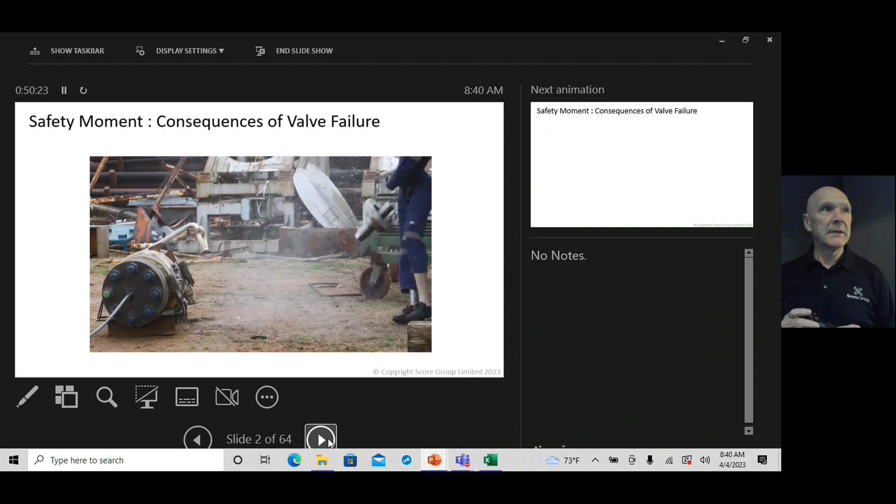We've got a valve being pressurized. What we've managed to do is get to about 40 psi there. There's our good friend Dick the Dummy. So what you're seeing there is an uncontrolled loss of containment on a processed fluid. It's liquid, it's a relatively small volume, but you can see the stored energy is absolutely huge. That's about a 15 kilogram chunk of stainless steel getting ejected and hitting our good friend Dick the Dummy and bringing him to an unfortunate end.

What we talk about is being in the line of force. You never want to be in the line of force. So when you're working in and around valves, understand that stored pressure and containment is the primary activity. Once we've got that under control, we can then start thinking about other things like through seat leakage. So hopefully that's focused everyone's attention on the dangers.

When we operate valves in and around the process plant, there are pretty much three things that we want that valve to do in terms of process, because the other answers you gave me are all about managing the process flow. There's a safety element, there's an environmental element, and there's a process efficiency element. So when we operate normal process plants, we're exposed to high operating costs, high exposure to risk, and our

efficiency suffers when we see those unplanned, unexpected failures in service. What we want to do by using condition monitoring tools is to move the needle away from the red bars and start focusing on the green bars. How can we take our operating costs to the lowest possible number? Because that helps us with profit margins. How can we minimize our exposure to risk and trend it to almost zero? I think absolute zero is a target. It might not be achievable, but we can certainly get very close. And then thirdly, we want to make sure that the process plant has maximum uptime. That requires reliability in our populations.

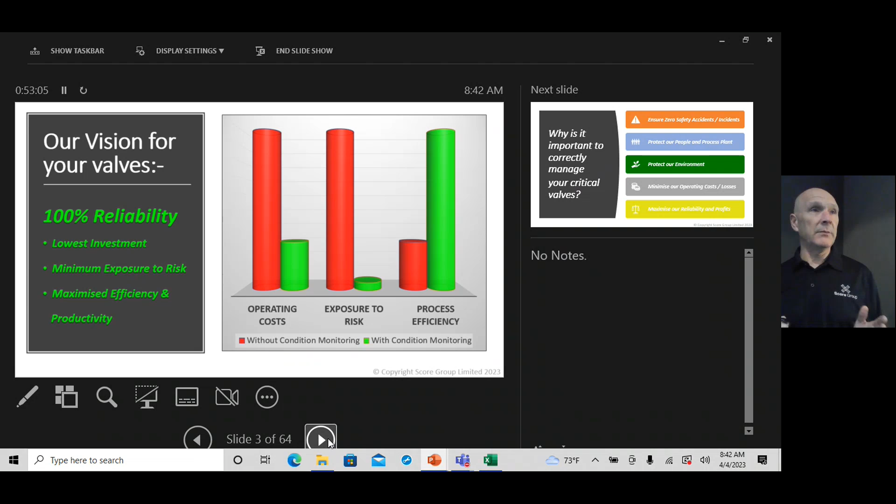So the key thing about all those elements is that when your valves start to fail in service, they give a really early warning signal, long before they cause that unplanned shutdown. So all of the tools that we should be using should be looking for that earliest possible indication so that we can catch it before it causes the unplanned reliability event. So that's how we move from red lines to green. The condition monitoring tools show us the early indication of where the problems are. We address them before they cause that unplanned shutdown.

Everyone understands, I'm sure, that an unplanned shutdown is a far higher cost than a planned shutdown, because in a planned controlled environment, you can pre-order spares, you can do things in a shorter time period. The window of opportunity to effectively create a repair is much shorter. So everyone understands the biggest cost on the plant is downtime. That could be anything between $1 million or, as one of our customers told me a few weeks ago, $3 million per day. These are big numbers. The valve repair pales into insignificance when you compare and contrast those two numbers.

So this technology should help us get to that zero accidents, incidents, near misses. We should be helping our people stay safe on the plant on a daily basis. We should be protecting our environment from those fugitive and through-seat leakage emissions. When we minimize our operating costs, it seems obvious to everyone in the room that we're going to maximize our reliability and resulting operational profits. So there's nothing in those five boxes that we don't want to happen. We want all of that stuff to happen. So that means we need to deploy the right tools at the right time and do the right maintenance at the right time.

When we do that, this will be all the outcomes that we can expect. So this is a really positive story. Condition monitoring will deliver all the benefits that are listed on the screen.

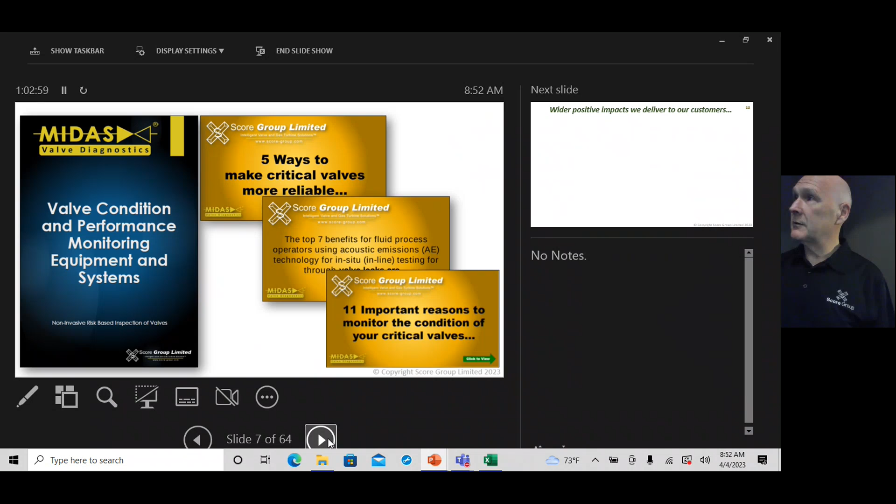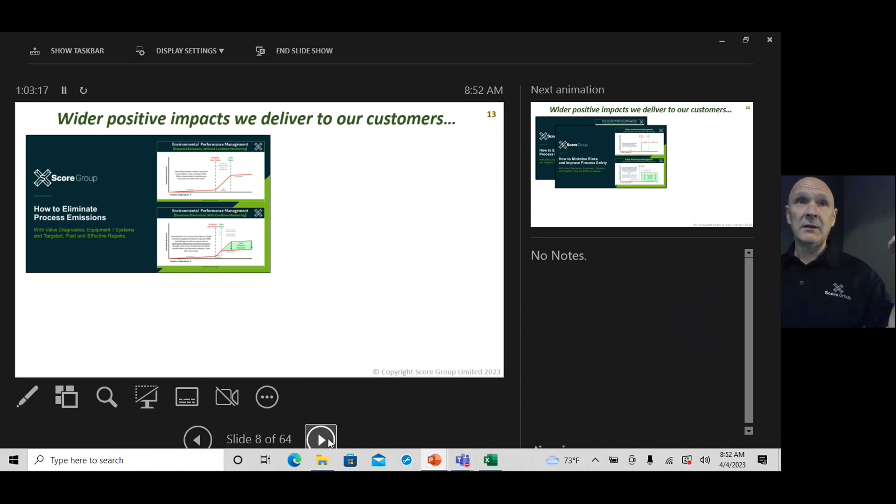Okay. One of my presentations in the main conference is going to be on the additional benefits that are delivered when you start managing your emissions. This always starts with the emissions discussion, and it always ends with process efficiency, reduction of losses, efficiency gains, all the things that are on these little graphs. Our start position is the top graph, our end position is the bottom graph. I'm going to speak about these in great detail in another presentation, so I'm not going to delve too deep into it today, but if you are interested in that, come along to that session.

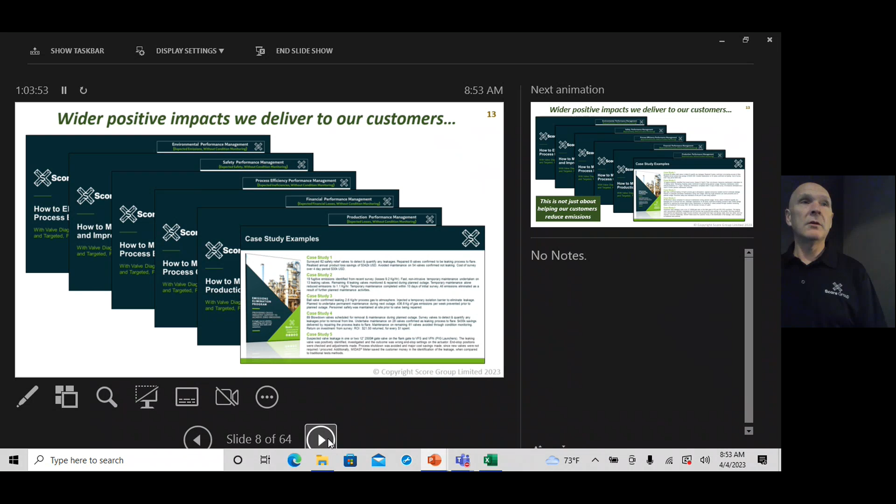I think it's on Thursday afternoon, just after lunch, and you can see all these little green highlights where the gains are made and how they are made. So in answering those questions, it's not just about the case study works, what was in it for someone else. You can start to think about what's in it for you specifically at your operating plant.

As I said, this is not just about emissions. People have been talking for a while about the burden of additional work scopes, additional monitoring sessions. You know, that takes a resource. If you want to send a guy out in the plant to do this work, as we did it when I was in a refinery, it could be days worth of work, somebody manually taking all those readings.

A lot more efficient to permanently install the sensors. That's layer 2 operation. So again, just think about that journey that you're likely to be on. If we can deliver value at step 1, you're likely to take step 2.

So valve management. Just for the operators in the room, do you currently have a formalized valve management program in play? Hands up if you do. No? Valve management is a simple process. There's only 5 steps. People talk about total valve management. You know, we talk about intelligent valve management. Intelligent valve management with those 5 steps will take you to the best possible reliability. So this doesn't need to be a really complex system.

Let's keep it simple. What most organizations do is they buy valves on the basis of someone a long time ago who was building a plant decided this valve should be in that slot. So the valve is defined on a valve data sheet. The valve data sheet goes to the procurement team. The procurement team go out to the marketplace and select 3 to 5 vendors who they think can offer that valve asset in accordance with the description on the valve data sheet.

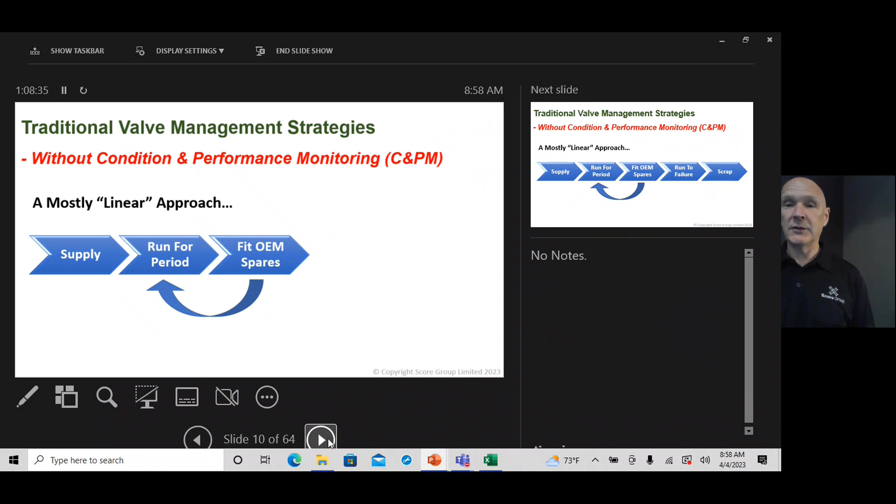Eventually, of course, all valves run to some failure point where you want to scrap it. And one element of that might be that you've got internal through-seat leakage, which has now caused erosion on the internal of the valve body because you've got an impact jet of process fluid leaking. The first thing that comes into the leak path jet of whatever your process fluid is starts to get eroded by that impact of process fluid jet. That wears down the body thickness.

Remember my first video, loss of containment is a disaster. So if you lose the ability to contain the process fluid in the pipe, you're in a dangerous position. So that is effectively one of the most common causes of run to failure.

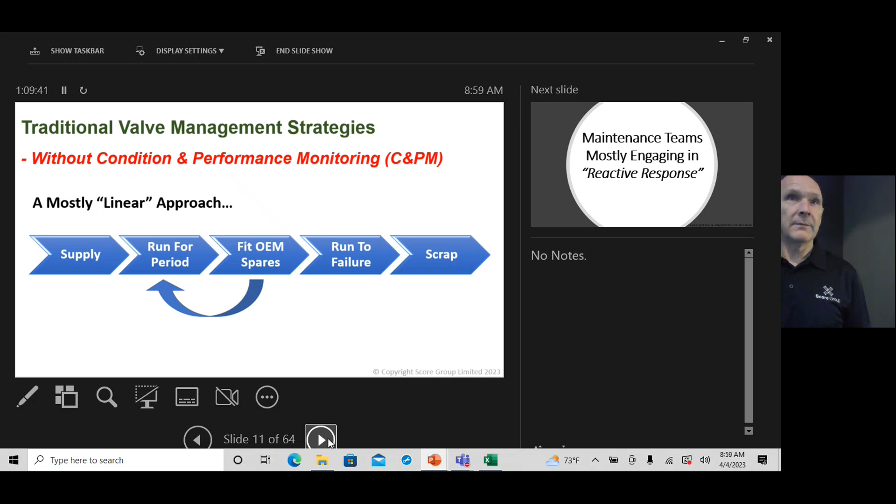Erosion on the internal body wall reduces its capability to withhold or contain the process fluid. So we'll scrap that valve and replace it with a new valve. Guess what? We go back into the 2-year cycle, even with a brand new valve. So this is broken. This is not efficient.

We want to move away from reactive response. We don't want to go run to failure, because if you've ever been on a plant where failures happened, it's ugly. I'm sure we've all seen the safety videos. So let's not go to reactive response. This is the highest possible risk that you could expose yourself to, and we don't want to be there.

So how can we change that dial? How can we move forward and get better reliability and spend less money? It confuses people when I talk to maintenance departments and CEOs when I say, do you know you can improve reliability by doing less maintenance? It fries their brain. They just haven't worked it out.

So that's what we're going to try and do. We're going to try and reduce the number of interventions. We need to quickly and easily understand where our problems are so that we can prioritize our outcomes. And our outcomes in some instances will be doing maintenance. In other instances, we'll be doing no maintenance, regardless of age of the valve asset.

So here's where the science comes in from Nowlan and Heap. Anyone who's been involved in reliability studies will know Nowlan and Heap have come up with a number of different conclusions. The bathtub curve is for mechanical products. Effectively you have infant mortality, as they called it. You see some early in-service failures. We go through a pretty stable operating cycle, then, in terms of late life failures, we're seeing that drilled down from mechanical failures in the field. Wear and tear, lots of different ways to describe it, but effectively mechanical failure.

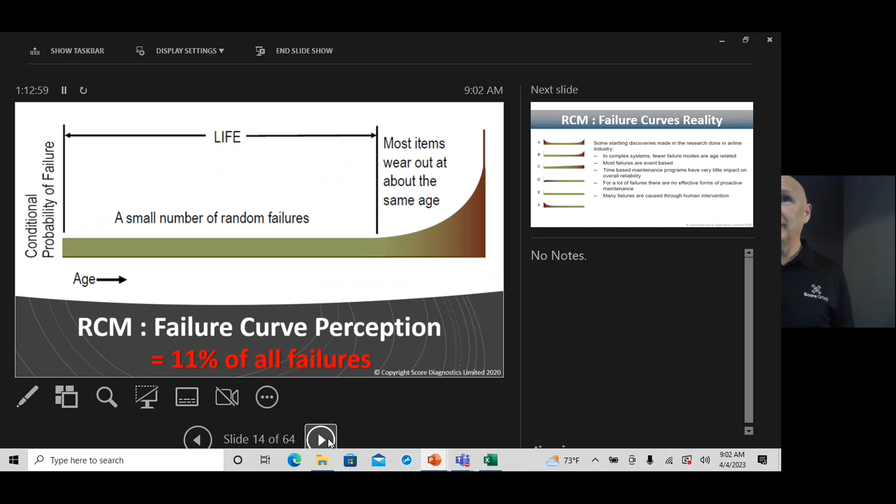So we need to change that approach. Let's not focus on the 11%. The bad news for Nowlan and Heap studiers is that the bathtub curve is just one of, as you can see on here, 6 curves. So what we're trying to do here is learn from the Nowlan and Heap study and say, what is it that we need to do differently?

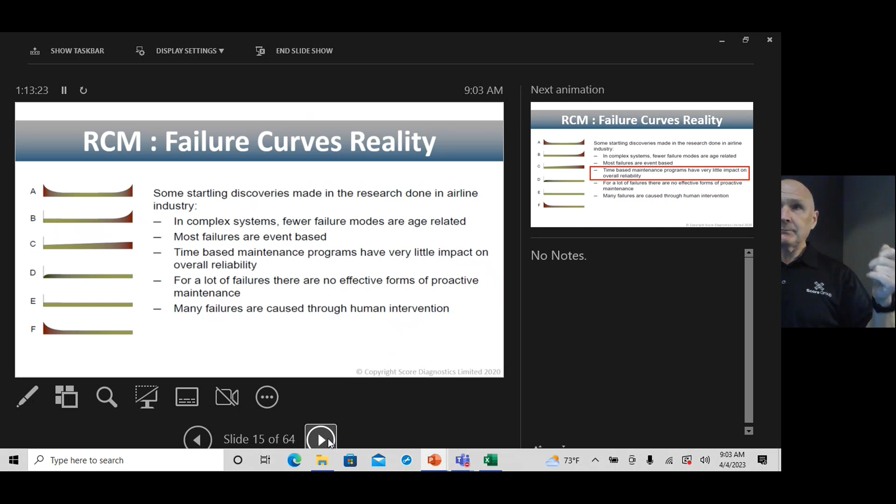There were two really important key pieces of information that flagged up to me in our early days on condition monitoring. Number one, time-based maintenance has almost no impact on reliability. Now think about that. That's what we do, as operating companies, that's what you do. That 2-year cycle of maintenance recommended by the manufacturer is having almost no impact on reliability. So why do we keep doing it? It's costing a lot of money to do that.

The second thing is, every time you let one of your operators go out there, and one of your maintenance team go out there and start playing with things, they break them. It wasn't broken to start with. How many times have we been in our own house, in our garage or backyard, trying to fix something and we ended up making it worse because we weren't the specialists at that specific piece of equipment? So a very simple story that resonated with our nuclear market customers.

This is important for the emissions discussion. When you look at emissions from valves, one of the most common failure modes is the stem packing. There are lots of conference presentations on stem packing materials and how to manage that stuffing box over its life cycle. So what we said at the nuclear conference was, if you send someone out to walk the line and look at all the valves, they will find a valve that has a stem leak. It's inevitable.

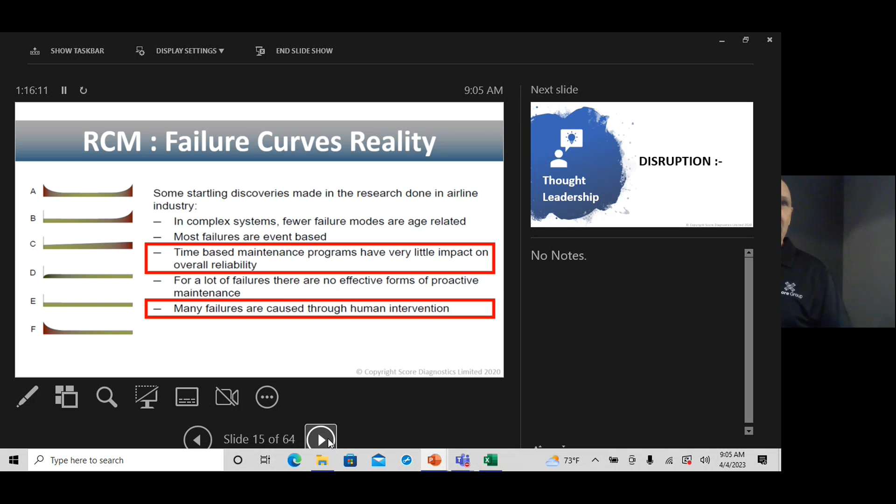So, really important part of the discussion. I'm a big fan of disruption theory. If we do what we've always done, we're always going to get the same results. This is not about getting the same results—we want better results, we want better outcomes. So we need to do things differently. What are we going to do differently?

We're going to introduce condition monitoring. Condition monitoring is what moves the dial from where you're currently at, with all these problems I've described, and takes you forward into that new space with lowest operating costs, minimum exposure to risk, and maximum reliability, profit, and efficiency. This is intelligent valve management.

Five key steps—I said it was really simple, let's not overcomplicate things. Step 1, front-end engineering design. When the process is designed, some smart engineer will say, this is the valve you need to do that work. That engineer will describe it in great detail and make it into a valve data sheet. He'll send that up to the purchasing team. The purchasing team then goes out to the marketplace. We buy the valve, and as SCORE, we also install valves—we can do all that work for you.

At that stage, we want to introduce the new step, step number 3, which is condition monitoring. Go figure—we're not just a valve company, we do condition monitoring as well. We've worked out that step 3 is the missing ingredient to get us toward this efficiency model I keep describing. So condition monitoring tells us the exact point, the optimum time in the valve's life cycle, to make that maintenance intervention.

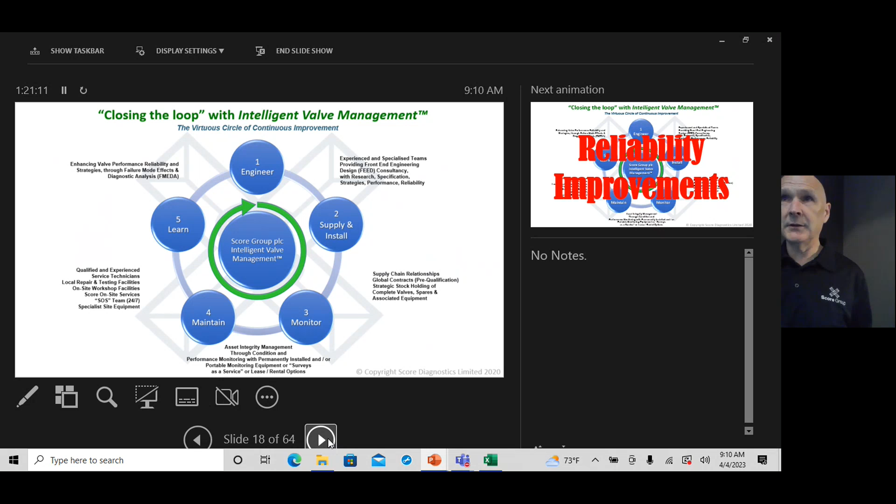So big numbers. So we're all about reliability. We're all about making that improvement that takes you to that beautiful space that we've discussed earlier. We talk about RBI. So the guys who are in pumps and motors, rotating equipment monitoring have been doing this for a long time. Valves were forgotten. The land that time forgot.

Yeah, we don't need to be in that space anymore. Let's use the available tools and work out what's the probability of failure, what's the consequences of failure, how often do we need to monitor that valve to be confident that it's still fulfilling its intended function. The minute it looks like it's not performing its intended function, we can start thinking about doing maintenance then. As long as it's performing its intended function, we're going to leave it alone.

Of course, there does come a point on this cycle where we think the risk is so high that we don't want to rely on somebody going out and using a handheld device. We want to permanently install sensors. So we'll be somewhere on that continuum.

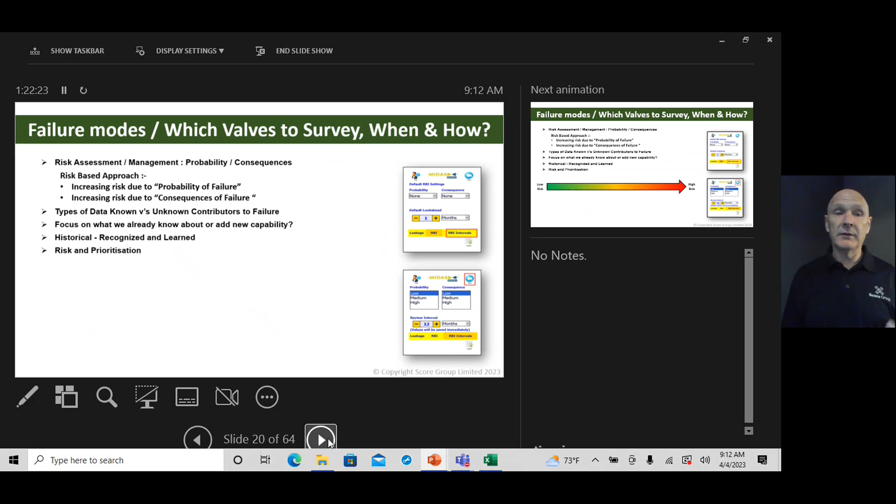Probability and consequences of failures allows us to select the correct monitoring tools and equipment to manage risk and prioritize our data set, to prioritize our maintenance activities. So it's all about efficiency. Infrequent manual surveys can be done with a handheld tool. If you want to move to semi-automation, then you need permanently installed sensors.

I'm going to give you some bad news. Whilst we're all in this conference looking at emissions, there's kind of two areas where that's going to come from in terms of valves. It's going to be leaks to atmosphere or through-seat leakage as your primary things, or the flange joint that attaches the pipe end of the valve to the pipe end of the pipe.

When you look at the most critical valves on your plant, you're not just looking at leakage as a failure mode. There are actually 48 recurring failure modes. That's bad news because you need more sensors. So what we've got in our continuous fully automated monitoring system is up to 12 sensors looking at your most critical valves, predicting in advance of failure those 48 failure modes.

Now, it's not just SCORE that's working on this capability. I sit on the technical committee in ISA, TR 9605, and what they're looking at is all of those 48 failure modes and how they can be detected in advance of the failure happening. So if we can see the trend towards a failure mode, we can do planned maintenance in advance of unplanned shutdown. So in terms of management of risk on your safety critical valves, you really want to go all the way past go, collect your £200 and be living at continuous, fully automated monitoring on those highly critical valves.

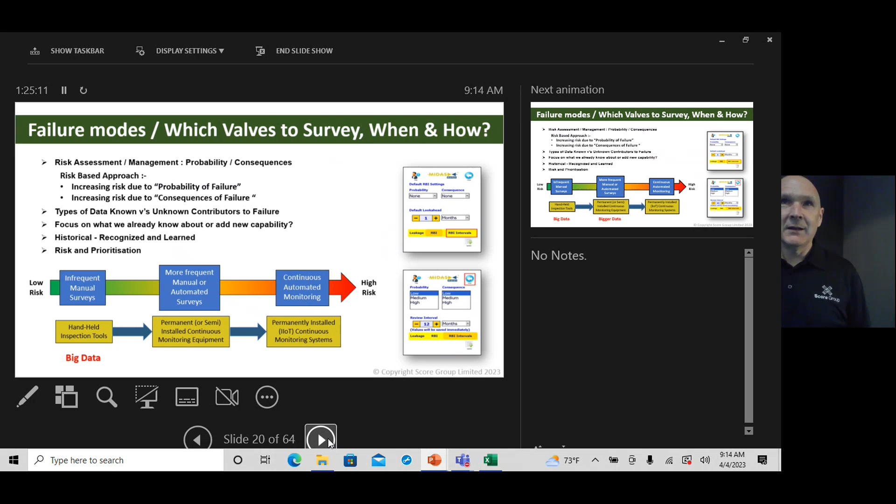Our guys in USA, our head office, said we have to invest in big data. So we started collecting all this data and we got to big data and we realized there was a problem. We wanted to create a data lake. What we ended up with was a data swamp. We had so much data and we didn't know how to analyze it. We didn't have the capability to do the analytics that would pull out the golden nuggets that would actually deliver some value back to us.

So as we move through our technologies here, big data is the start point, bigger data is a midpoint, and the biggest data set is where the maximum value can be returned on your investment. The key to this is being able to do the analytics. How can we connect each part of that data set to a failure mode? That's where the magic happens.

So this is all automated. You don't have to be an expert analyst to make that happen. We've done all the hard work in the background. We just deliver back to you where you can add value. So it's that little bit in the closed loop of five dots that says, what are we monitoring and what does it mean? And how's that going to drive our maintenance program?

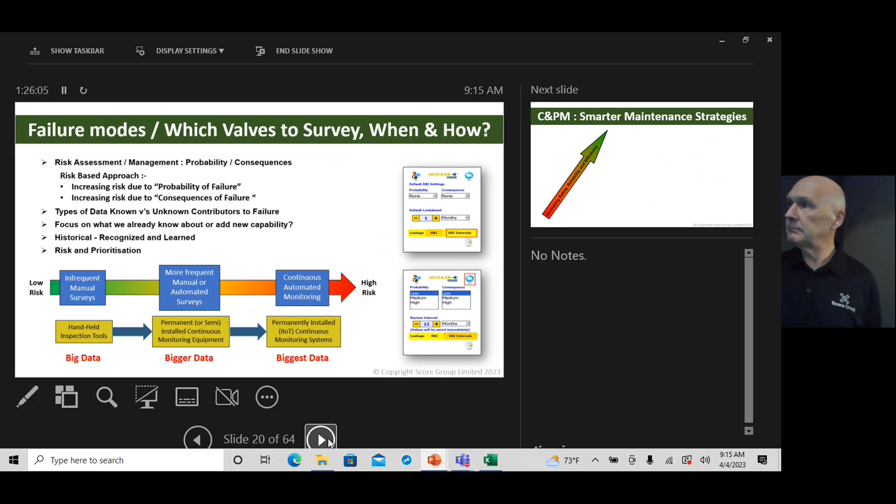So it's all about improving reliability. We start with troubleshooting. This handheld device, entry-level product, sometimes customers just go out and say, I've got a problem in my process. I can see there's leakage, but I've got a manifold situation here. There's multiple valves. I don't know which one's causing the problem.

If you're doing that on a flare line, and by the way, flare lines are the biggest emissions because flare lines typically have leaks on the valves that are difficult to find. So the flare's going on for days, weeks, maybe even months. You can't get to the root cause. This will take you to the root cause. But it means that someone has to go out and survey each of those valves manually, and you will find it. So that's troubleshooting, just where is the problem.

So that's level 1 operation. Level 2 operation takes us to what I call value-based maintenance. Value-based maintenance is looking at all the data that we've been able to collect and say, okay, which are the valves that we really want to address in our next planned turnaround? Where can we make the efficiency gains?

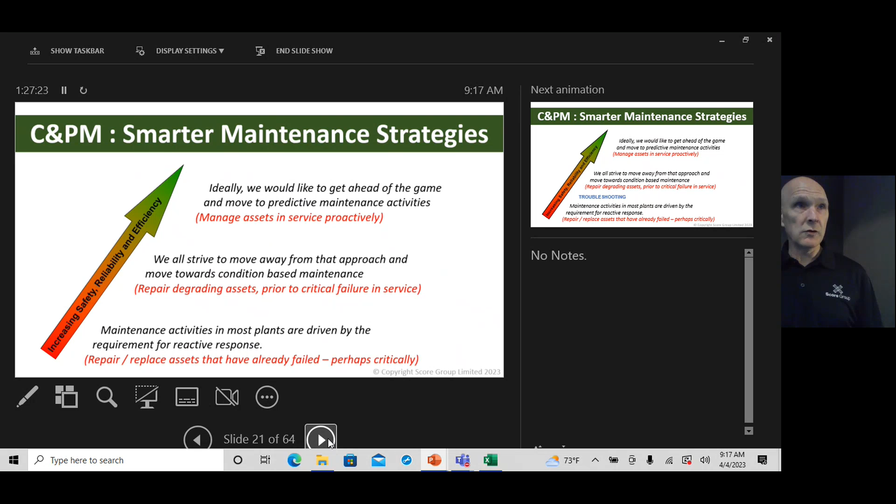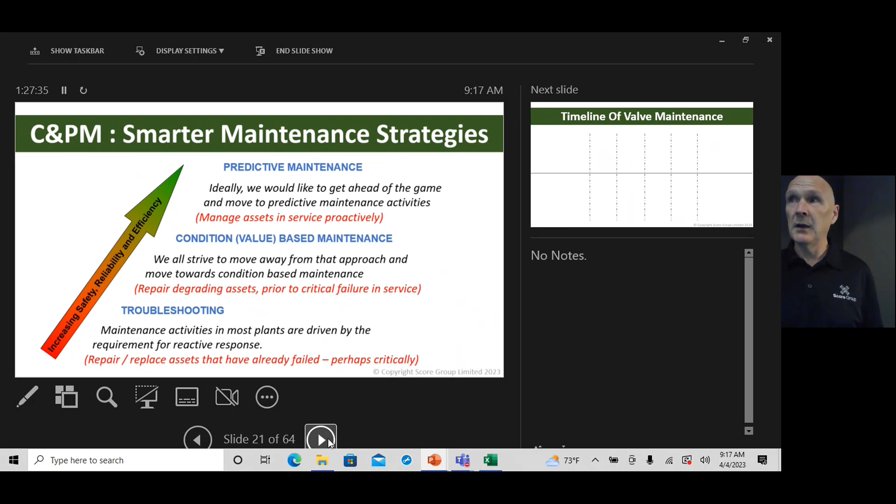Step number 3, of course, is the Valhalla that I mentioned earlier on. That is trending and looking at rate of leakage change over time, because that's what takes us to predictive maintenance. So troubleshooting level 1, value-based maintenance level 2, and predictive maintenance is peak performance. We want to take your process plant to peak performance. If we can get you there, we'll be the superstars that charged a few thousand dollars to return on your investment many millions of dollars.

So calendar-based maintenance, I've mentioned this already. Typically what happens in calendar-based maintenance is you have that recurring metronomic approach. The computerized maintenance management system said, do a planned shutdown every 2 years, fit OEM spares, and we'll be good to go for another 2 years. Nobody wants that anymore. They're saying, can the 2 be 3, 5, 8, 10, whatever? The answer to that question is yes, it can.

At the moment, your maintenance budget is being completely consumed by calendar-based maintenance, most probably. I can't say that for every operator because we are working with some who've already changed their approach. So how do we do it differently? Condition monitoring will be done on a risk-based inspection basis. And what you're going to find is when you start doing that survey work, most of the valves that you're repairing on that 2-year cycle are still okay.

Now, you're erring on the side of caution by doing that 2-year maintenance intervention. It's just in case maintenance. But remember, 40% of all failures are human induced. Letting your guys play with those valves and, in inverted commas, fix them might be making things worse.

So you can see here in my new approach, we've had the same operating cycle over 10 years. Calendar-based maintenance says that valve got repaired 5 times. It wasn't actually repaired, you just fitted OEM parts. When you start introducing condition monitoring, if the monitoring equipment says the valve is okay and operating fine, guess what? Leave it alone. Don't touch it.

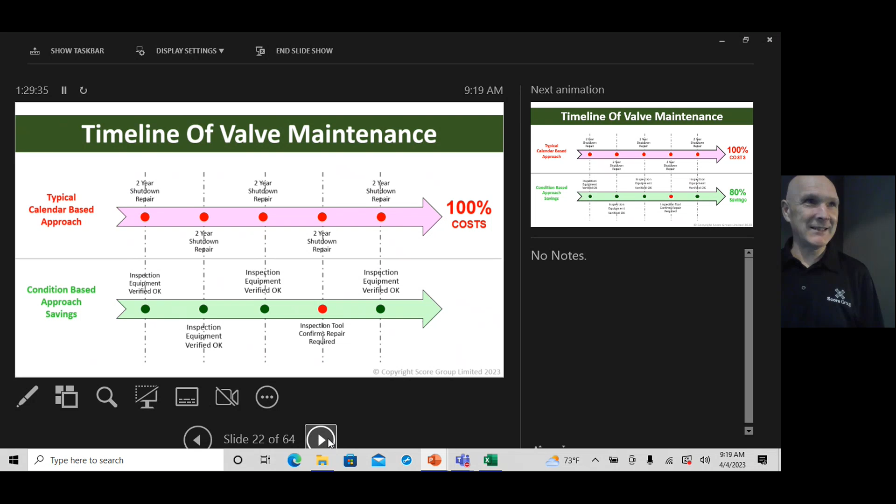Don't break what's not needing fixed, okay? So you can see in this example here, we did one repair over that ten-year operating cycle, and that already delivered 80% savings. Now think about what those 80% savings are. I'm not just talking about consumption of spares.

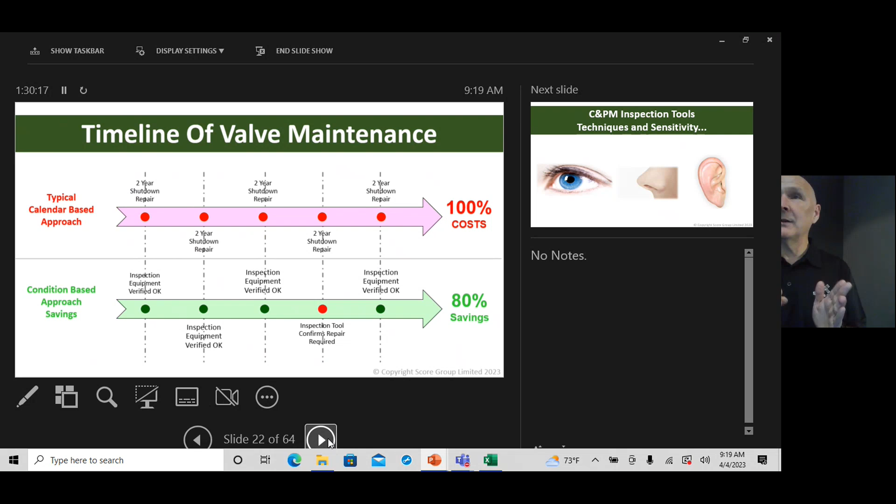It's one of many tools you will have been using on the plant already. And one of the challenges when I start talking about listening equipment, because we can use cameras to see things in more detail or different things. We can use sniffing technologies, gas analyzers, to detect gases in different ways, more sensitive than human senses. When I start talking about listening devices, people say, yeah, we used that in the past and it didn't really work for us.

And there's a specific reason for that. The listening devices used in the past were listening in the wrong sound frequency response range. They listened between 0 and 60 kilohertz. Human hearing takes you to 20. So by using ultrasonic equipment, it was effectively giving you three times human hearing capability. And the reason 60 kilohertz was chosen is because that's where the roots of rotating equipment monitoring systems are firmly embedded. So if you're using ultrasonic equipment for pumps, motors, vibration, you're typically listening 0 to 60 kilohertz, mechanical noise.

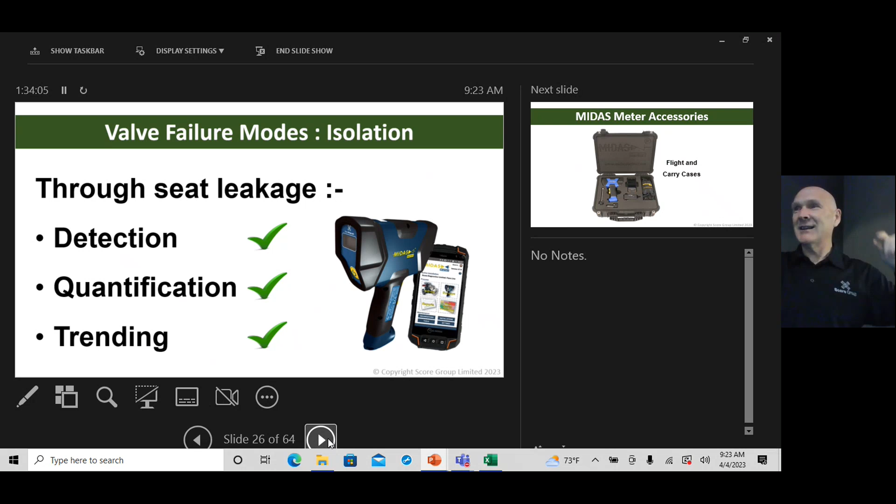Did you have a question? Quantification. Leak detection, quantification, and repair only when necessary. So let's all try and get the hashtag trending. Maybe we'll finally manage to do it this week.

So like all products, we deliver this in a carry case, flight case. The key element of the toolkit is the listening device itself. There's no headset, it just comes. The first question we're always asked is, will it still work in a noisy area? And the reason people ask that is because human hearing, 0 to 20 kilohertz, used to be one-third of the range of the ultrasonic device capability.

So what we said was, we don't want to be distracted by plant noise. So we've filtered all that away. We've taken it out of our equation. That's why we tuned our sensor to only listen between 60 and 600 kilohertz. So that noisy area of the plant that you want to use this on is not an issue for us, because if you can hear it, it's below 20 kilohertz, and we're only listening starting at 60 kilohertz and going all the way through to 600. So even the noisiest area of the plant, this will give you the correct answer.

No more guesswork, no more confusion. The other thing we're asked is, do we need a baseline from the brand new valve to make this device work in terms of quantifying the leak? The answer to that question is no. You can deploy this tool at any point in the valve's life cycle and still get the right answer.

The reason for that is we've done all the research. The research on all the differential pressures, all the fluid types, all the valve sizes, all the orifice sizes, in other words, the leak path sizes, leak path geometries. We've done all that research work.

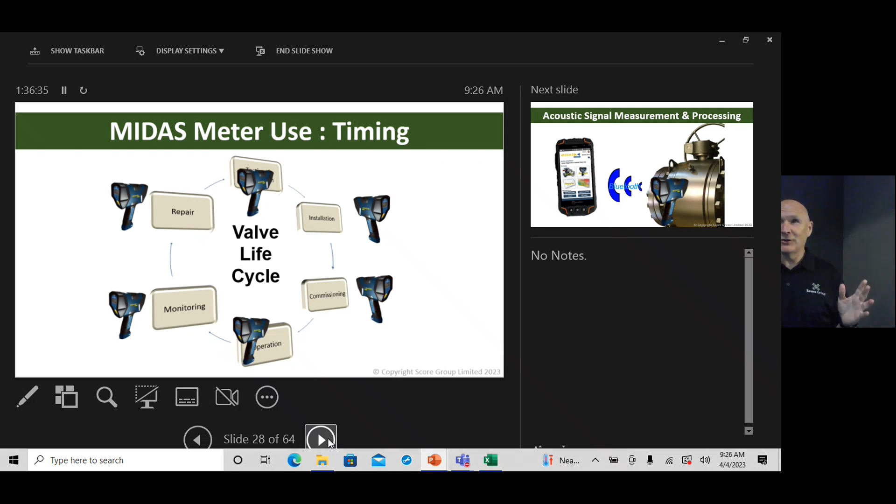This is not something you pick up and decide, you know, we're going to redesign a product, we're going to develop it next week. This has taken us 20 years to get a one-size-fits-all tool that you do not need a baseline from the valve on when it's brand new. So it's been a long journey for us. Exciting, we can now use it in any part of the valve life cycle.

So deploying it in the field, we take readings from the valve body, upstream and downstream of the valve. We click this little switch on the front here. That sends a signal by Bluetooth into our handheld calculator device, which then converts decibels of noise into leak rate going through the valve. So we want certainty in our survey.

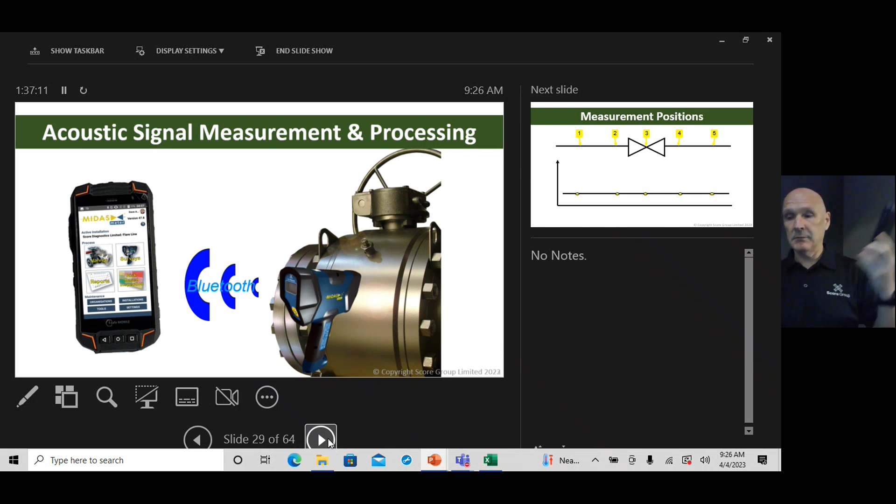If there's anything in and around our valve causing nuisance noise, we're going to be able to find that, and we're going to be able to eliminate it from our survey results. That is why we take readings upstream and downstream of the valve, as well as on the valve body. So this is a complete survey using technology. We start on the upstream side.

We start with a background reading, make sure the sensor's working, and then we start taking readings from the pipework. Position 1 is upstream far, position 2 is upstream near. Depending on the valve size, we'll take at least one reading from the valve body. If it's a bigger valve, we'll take multiple readings all the way around the valve body.

All the intelligence for how many readings do you take on which valve type, which valve size, is all pre-programmed in here. So literally, I can make you a leak detection expert in 30 seconds using this technology. So when you come up to the expo hall, you'll see we've got a little demo panel, and you'll be able to play with this. So I encourage you to come across and actually get hands-on with it. 30 seconds worth of intervention will let you find the valve leak.

Yes. So what would be the threshold on it, or would it just tell you, period, if anything's coming out from any part of it? So there's a number of thresholds that we need to think about. There's potential banana skins in all surveys. The first banana skin I'm going to talk to you about is external noise. So any interference noise that's in and around the target valve that you're trying to survey.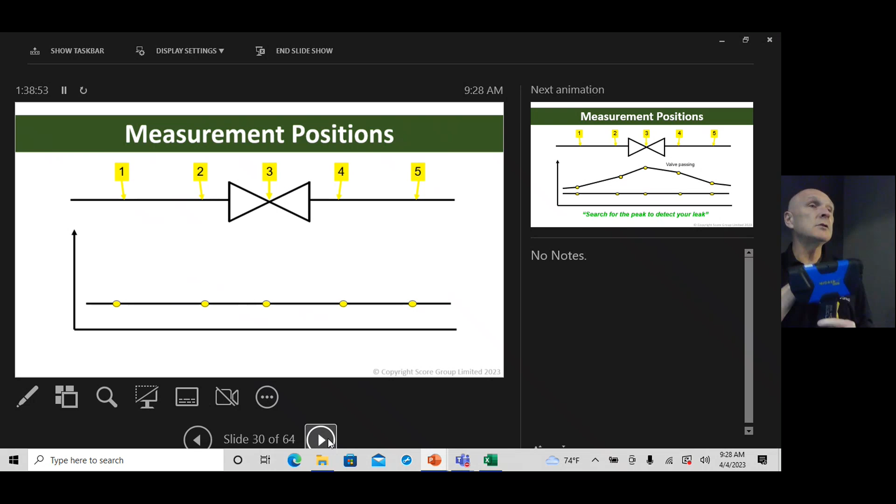So this survey here, if this was our result, when you switch the device on, it'll say 21 plus or minus 1 decibel on the LCD screen there. That's effectively the sensor here in the onboard electronics. It will never change unless you've broken the sensor. So threshold of detection, typically for a conclusive leak detection, we're looking for at least 1 more decibel than what we've got as our background reading.

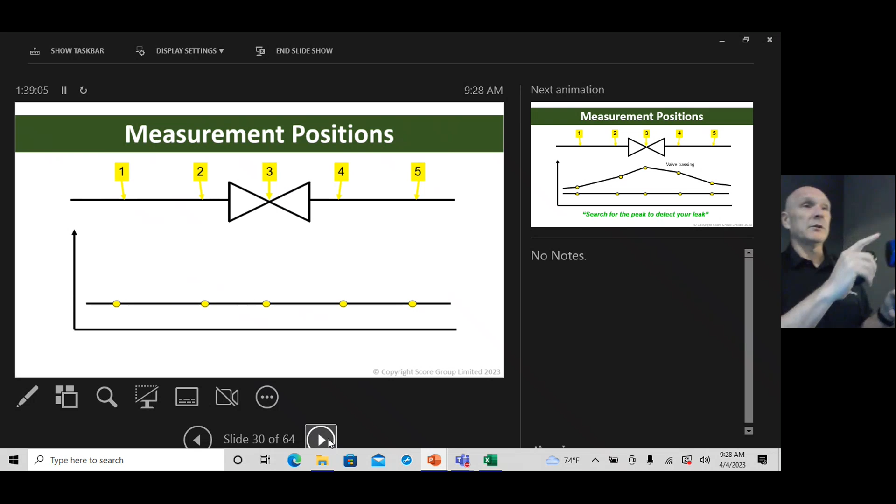So let's say we're in 21 plus or minus 1. Let's say we're at 23 decibels, and upstream and downstream of that valve we're measuring 21. We're talking about leakage there. So the more decibels of differential you get from upstream and downstream, the more conclusive your result's going to be. So again, these factors are all controlled by differential pressures, valve sizes, fluid types, leak path geometries. So lots of variables in that equation. So there are multiple thresholds that we need to get you to fully understand.

But if this is our survey result, let's say we got, and every process has noise as well, I should point that out. So this could be actually 30 decibels at each of those positions, but we've got a flat line. It's exactly the same reading upstream, on the valve and downstream. That valve is not leaking. I'm conclusive in my result here. No leak detected.

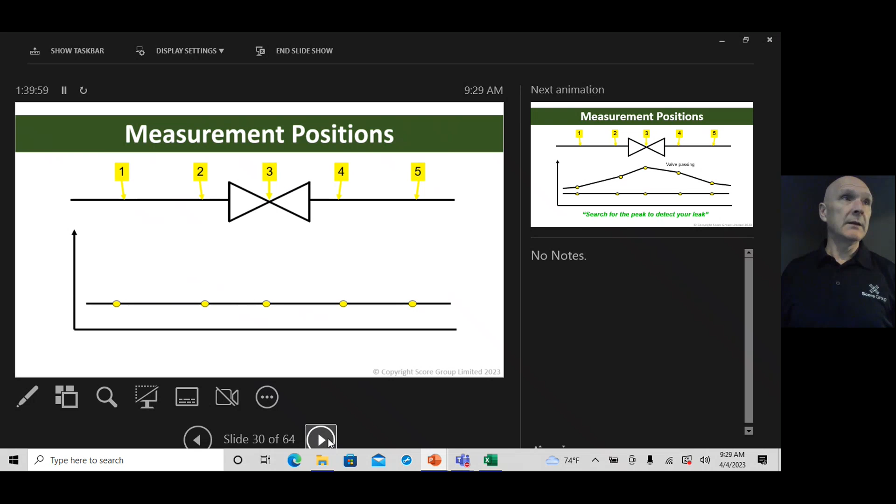In a leaking valve, we're going to see the peak signal on the valve body. So again, just for the purposes of translation, sometimes this gets lost in translation. When we say valve passing, we mean process fluid is passing across the seat-to-seal interface. It's not passing the test, it's failing the test, but fluid is passing where it shouldn't be passing.

So peak signal on the valve body, we're seeing increase in decibels as we approach the valve, and as we move away from the valve, we see those decibels dissipate. High frequency sound signals do not travel over long distances. So we talk about signal attenuation. So that high frequency signal, even within a few centimeters, you're starting to lose that signal. So the further away you get, the more conclusive result you're going to see.

We talk about near and far positions, and people get really excited about how near is near and how far is far. We cover all that on the training course. It's not a critical distance. What we're looking for is differential signal. Okay.

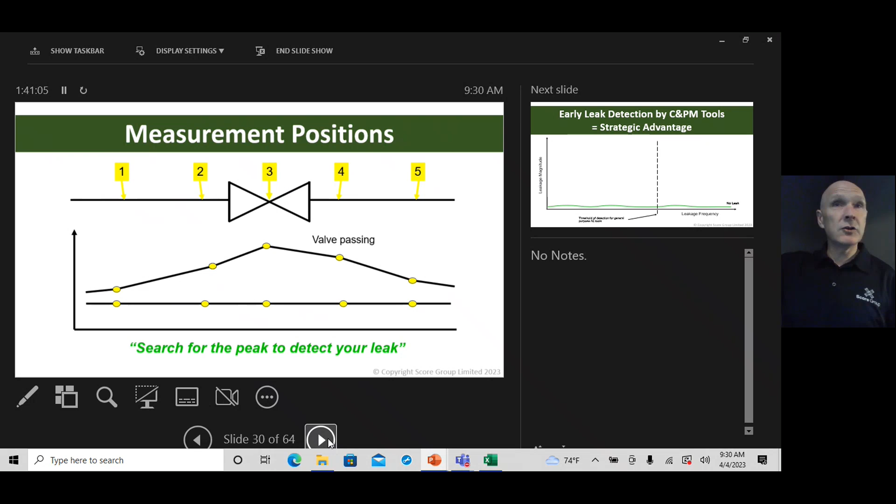So here is the science I've mentioned before. The threshold of detection for ultrasonic devices is on the left-hand side of the graph here. Threshold of detection that we're interested in is on the right-hand side of the graph. The dotted line, the vertical dotted line, is effectively 60 kilohertz.

Ultrasonic equipment cannot find early leaks in valves, and that is where the biggest possible advantage can be delivered with condition monitoring of valves. So that's why we tuned our device to listen above their threshold of detection, typically above 100, above 300, and just short of 600 kilohertz. Early leak detection gives you that advantage in your maintenance program. You can now start trending that leak over time.

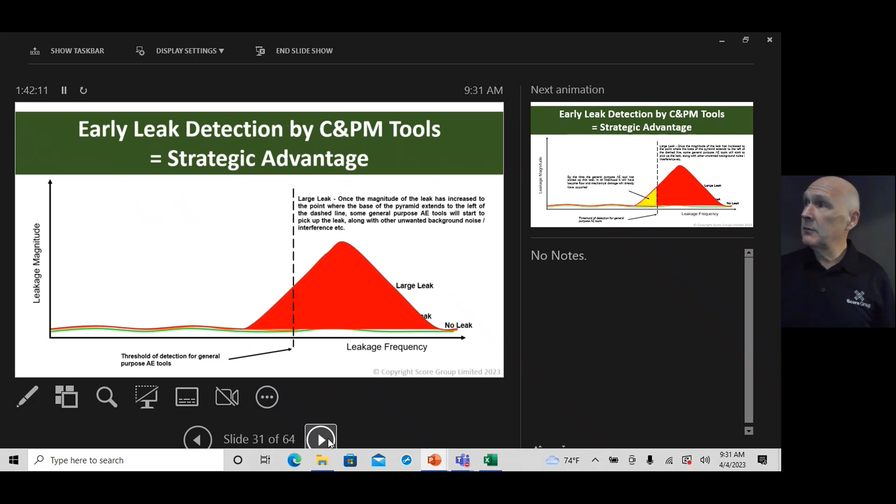The reason people thought ultrasonic equipment was going to be the answer is when the leak gets really big, the ultrasonic equipment will be able to detect it. But you're already at a stage where you've got significant mechanical damage inside that valve. If you're lucky, you found it with the ultrasonic equipment. If you're unlucky, it's already gone bang, because that mechanical damage is already significant. So we don't want to rely on the ultrasonic equipment anymore. We must move to the acoustic emissions with that higher frequency signal and that earliest possible leak detection.

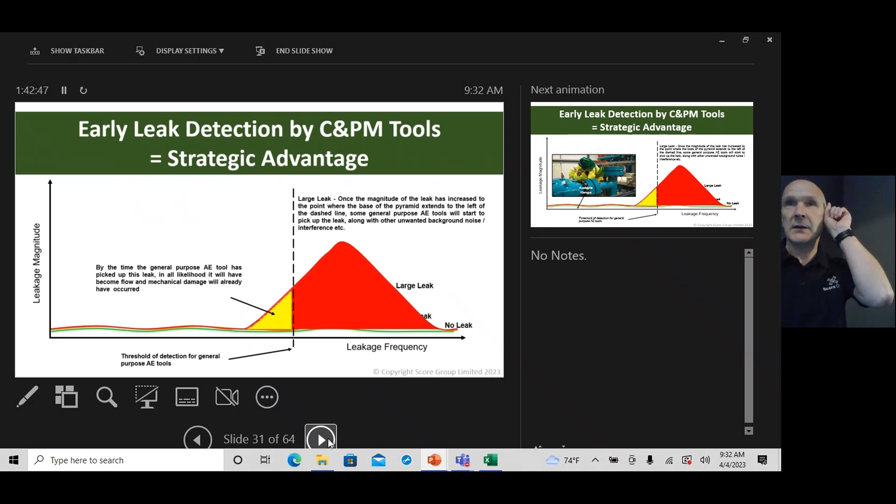Has anybody got a guy in your maintenance team that says, I don't need any fancy equipment, I'll just use a screwdriver? And you got that guy? See this guy? He's dangerous. He's walking about the plant with a screwdriver. He's listening. Most of these guys are also quite, let's just say, experienced. In terms of age, the number is higher. They've already lost the capability to even listen to 20 kilohertz because they've been in and around mechanical components, their hearing's a little bit less.

That guy with the screwdriver telling you where your leak is, is living in cuckoo land. He's got no idea what's happening over here. And by the way, if he's poking rusty old valves with a screwdriver, don't stand beside him. Remember, human-induced failures, 40%. That goes bang.

It's a funny story, I was on a process plant in Scotland. I won't tell you who the operator was, but they closed the valve and the whole process pipework started shaking and rattling, and I'm getting really nervous here. And I said to the guy I was standing beside, an old operator guy who's seen everything, done everything, look, I'm a bit nervous about all this vibration that's going on in the plant. Should we not move away from the area? He goes, no, everything's fine. But if you see the soles of my feet, run in the direction I'm running in. I'm like, you can't run fast enough to get away from an explosion. That's not going to happen. So don't rely on the guy with the screwdriver.

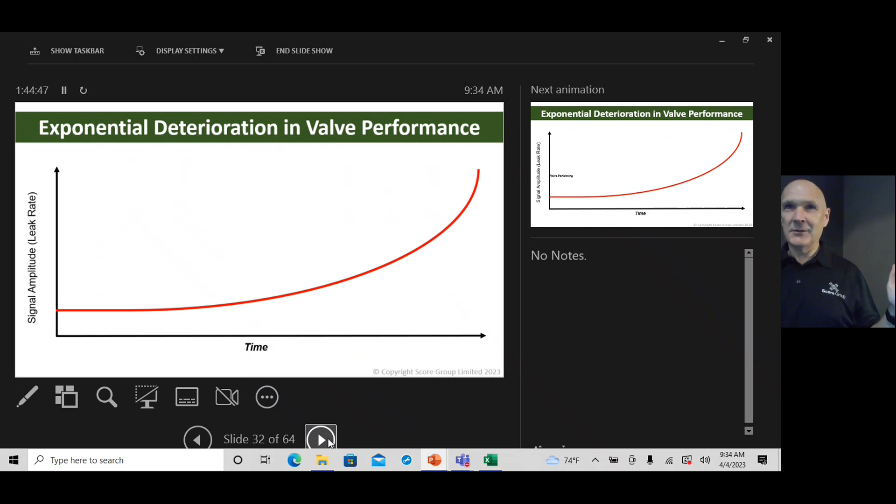When the valve was brand new, just to clarify for everybody in the room, every valve leaks. People talk about zero leakage. It's not happening. Every valve leaks. Every time you operate a valve, you put the seat-to-seal interface at risk. Even when the valve was brand new and it went through its factory acceptance test, there was an allowable leak rate for that manufacturing standard. And that's to make the valve cheap to sell.

If you want every valve to be zero leakage at the manufactured stage, you're going to have to pay a lot more for your valves. Nobody wants that. So the standards, ANSI, API, all the standards say there is an allowable leak rate for that valve when it's brand new. So even when you put that valve into service brand new, it's leaking. But it's leaking at a tolerable limit.

You start operating that valve, any debris, any foreign particles can scratch the seat to seal interface, that rubbing action, whether it's a sliding gate or a rotating ball or whatever. Your seat to seal interface is at risk with every single operation. So the first time you operate the valve, you could have created a leak path. You don't know it's there because we don't have X-ray eyes. And we didn't previously have the tools to be able to find it. We now have the tools.

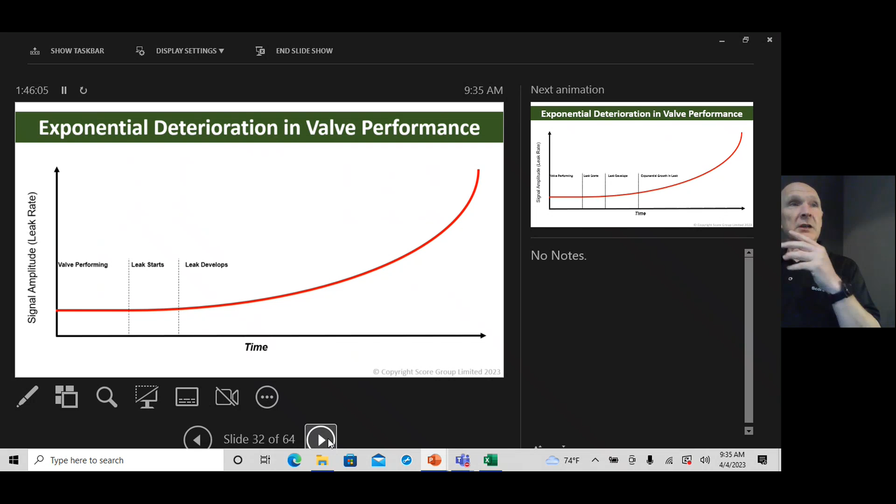The more times you operate the valve, the more that opportunity for foreign particles is going to create more leak paths. The longer you leave that leak path in play, the process fluid coming through that leak path is going to start doing that erosion exercise that I mentioned earlier on. So the erosion, the stripping away of particles, makes the leak path bigger over time. And that's why in late life, you'll see an exponential rate of change in your leak rate growth over time.

Without condition monitoring equipment, you have no idea where your valve is on that life cycle today. And this could be tens of thousands of valves. Typically 10 to 15% is what we find doing surveys need action. The other 85%, 90%, you can leave them alone. So what this condition monitoring tool is going to do is the survey, and it's going to report back to you. Certainly we don't want to cross this line here, BER, beyond economic repair, but we're going to give you traffic lights.

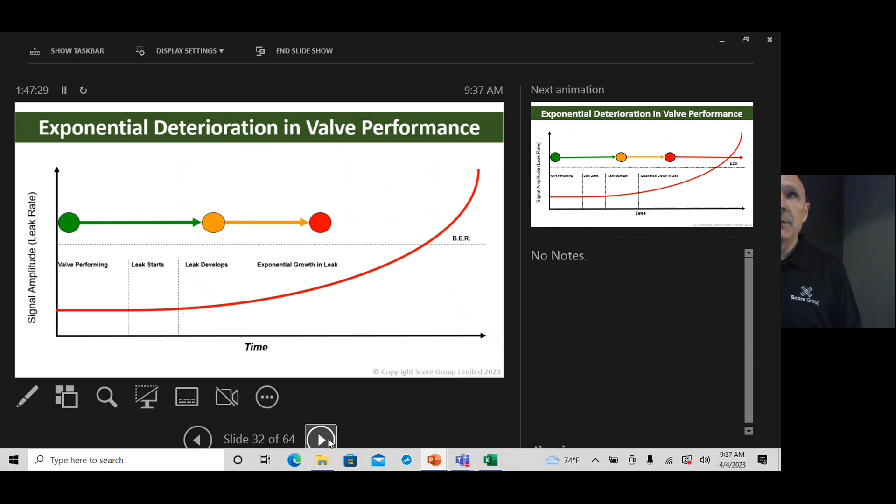Green says that valve is okay, we can leave it alone, it's doing what it needs to do, it's got a tolerable leak rate. Amber says we're now between 50 and 75% of the allowable leak rate. We want to think about planning maintenance on that valve. We're not ready to do it yet, but if we've got a planned turnaround, we can put that valve on the list. Once it goes red, it needs to be on that turnaround planning list because you want to make that intervention. It's already exposing you to risk.

Now you can play about with these numbers. You can change the percentages. We've got 50% and 75% as default settings. I've got a customer in Holland who said, we've not done maintenance for 7 years on our valves. If I went out and surveyed every valve, probably every valve would be red at 75%. So I'm changing amber to 100% and red to 200% of the allowable leak rate so that I can still prioritize my repairs, because I've not got the budget. I don't have the timescale to repair every single valve in the next turnaround. So manage risk, play with those equations yourself, and think about allowable leak rates.

This is probably the hardest thing for customers to get their head around when you start having this discussion on the plant. People immediately go to ANSI, API, all those leak rates that you've been working on when the valve was brand new. Brand new allowable leak rates have got nothing at all to do with allowable or tolerable leak rates in your process. So again, one of those little resources that you can download from my LinkedIn page or from our website talks about what is an allowable leak rate. How do you define that? Where does it come from? And how do you manage that over time? And that's probably one of the most important parts of this discussion.

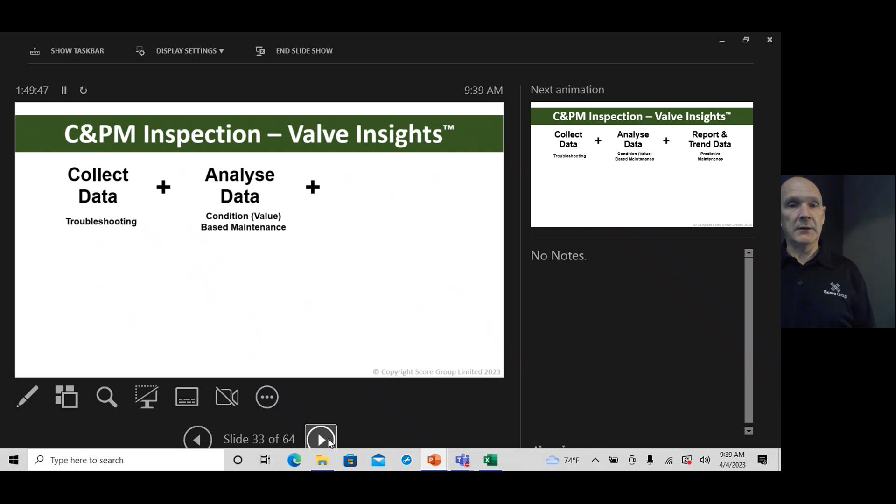Where is my biggest leaks? That's where I can get the best return on investment in the shortest time scale. And can I trend and report that over time? How is my leak rate changing?

The great thing about this technology is it takes about 2.5 minutes to do a survey on a valve. Remember that pressure build-up test I was talking about on your critical valves? One of our customers said to us, it takes $3 million to do a pressure build-up test on one of our riser valves offshore. The EPA have mandated that we do that once every 30 days. If we don't do it within 45 days, we get fined. So effectively, every single riser valve in that customer's population is being tested every month at a cost of $3 million. Multiply that over multiple riser valves on each platform, multiply that over multiple platforms, it's costing a fortune.

So we said, why are you doing pressure build-up test? We can give you the same certainty of leak rate quantification using this tool in about 10 to 15 minutes. So that $3 million you're losing in downtime can be returned to your profit. That's why we won the award for the Energy Industry Council. We moved the dial. A few thousands of dollars versus 3 million.

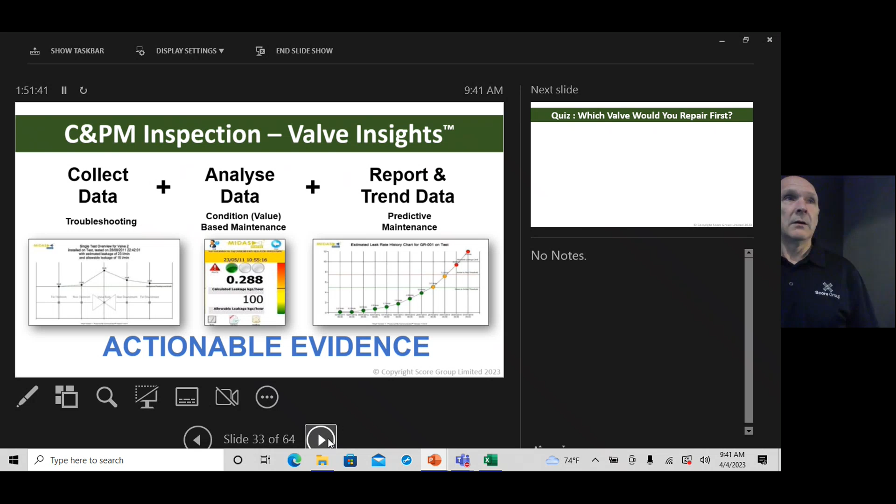It's a no-brainer exercise. So it's not about big data. People talk about big data, but for me, the only data you're interested in is actionable evidence. What is this data telling me I need to do with my valve population? If we can get that answer from the system, and you can see in all our reporting structures here, all our filtration of data takes you to value-based maintenance. No more guesswork, no more confusion. You're only spending your maintenance budget on where it's required.

So allowable leak rates. Again, this is probably the hardest bit to get your head around if you're just finding this technology today. Here is a survey that I personally did on a plant on 10 valves so that we could have this discussion today. Out of those 10 valves, which valve is the most interesting to you in terms of your maintenance investment? Which valve are you going to repair out of those 10 valves?

What's your target valve? Number 6. Why have you chosen number 6? Why would you choose that valve? Yep, it's the most obvious answer. The leak rate is higher than the rest. Now, if all these valves are on exactly the same process line, with exactly the same process fluid, with exactly the same risk profiles, clearly valve number 6 is the target valve. Biggest risk, biggest loss of efficiency, could be biggest lost product.

However, here comes the caveat. If these valves are not all in the same process, the biggest risk might actually be valve number 4. That 0.1 litres per minute of leakage is benzene going into an area of the plant where there are humans walking about. What's your biggest risk now? So we have to understand what's the process fluid, what's the risk profile, and then we can start to do our analytics to focus our attention where it's absolutely necessary.

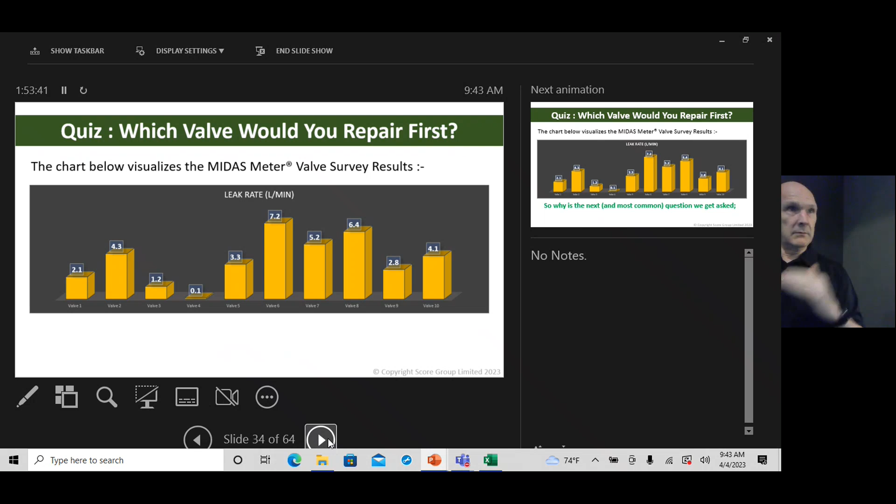This is not just a leak rate equation. So that exercise I said, where we exported to the CSV file, went to the column, that prioritization gives you leak rates, yes, as we would want to look at leak rates, but the next layer of value has to come from understanding the process fluids and the risk profile attached to each of those valves. So what I'm trying to say here is we have to have a serious conversation about what an allowable leak rate is, and you have to be able to answer the question why you've selected that profile for that valve.

We always get asked, what is the smallest leak rate you can find? Well, the answer is actually on the screen. On a big valve at low differential pressure, we're not going to report anything less than 0.1 litres per minute. In terms of the bigger valves, you know...

I spoke to Rajan about what sort of leaks are you trying to find on the process plant. This is Chevron. And he said, I would like to find 0.1% of the flow rate in terms of a leakage. Okay, so that's about 1,000th of the seat to seal interface would be a leak path. He said, I would be happy if we could quantify a leak rate that's somewhere between 1 and 2%. If we could do it between 1 and 2%, we would probably invest and roll this out across the whole of Chevron.

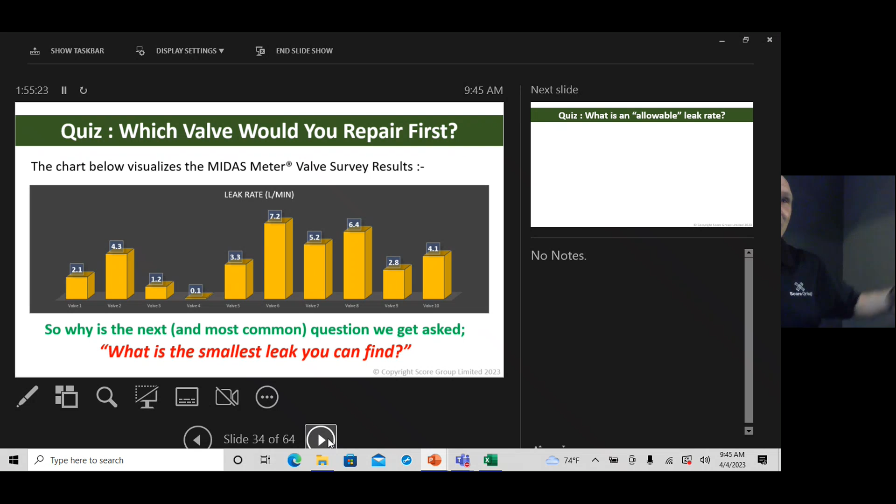So if you can prove it works over that scale, this is literally a current conversation we're having. If you can prove it works on that scale, we can go on a rollout program. And I said, I'm more interested in the 0.1% because I'm sure we can do the 0.1%.

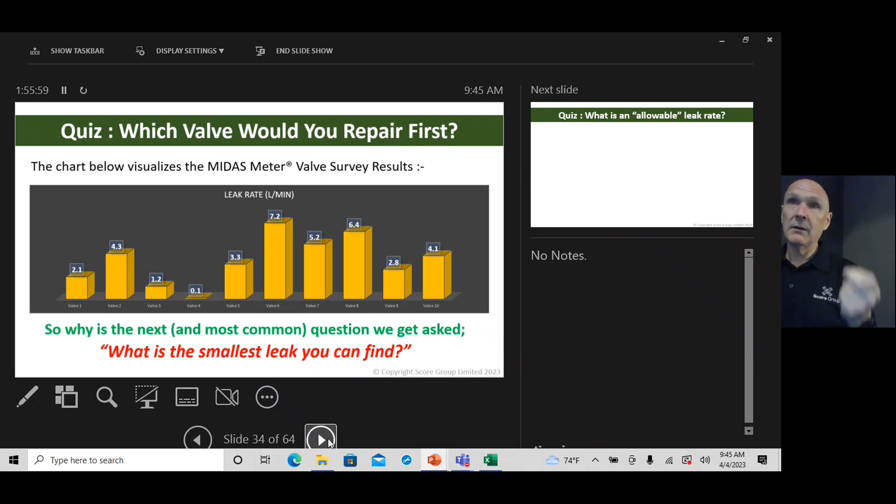This is what it's all about. It's not about finding the smallest leak rate you can. Yes, we want that earliest possible indication, but we have to understand risk. The key part of the discussion is risk. So don't just be confused by finding the smallest leak. Find the important leaks at the earliest opportunity is my advice. And consider what is a tolerable leak rate in each of your valves within the process.

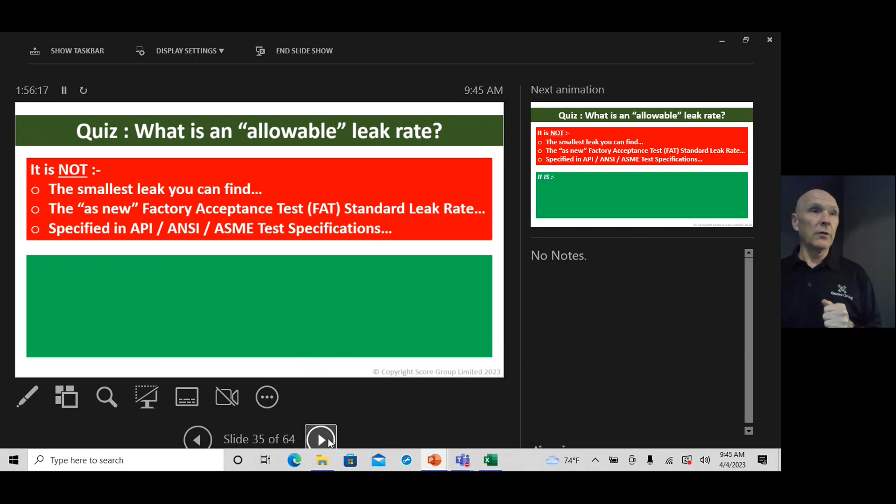So allowable leak rates are not factory acceptance test standards. It's not the smallest leak you can find, and it's not what's defined in the as-new valve factory acceptance test standard. It is what the process can tolerate, where the risks are in your process. Is it a human factor? Is it an environmental factor? Is it a process efficiency factor? How do we manage all those risks?

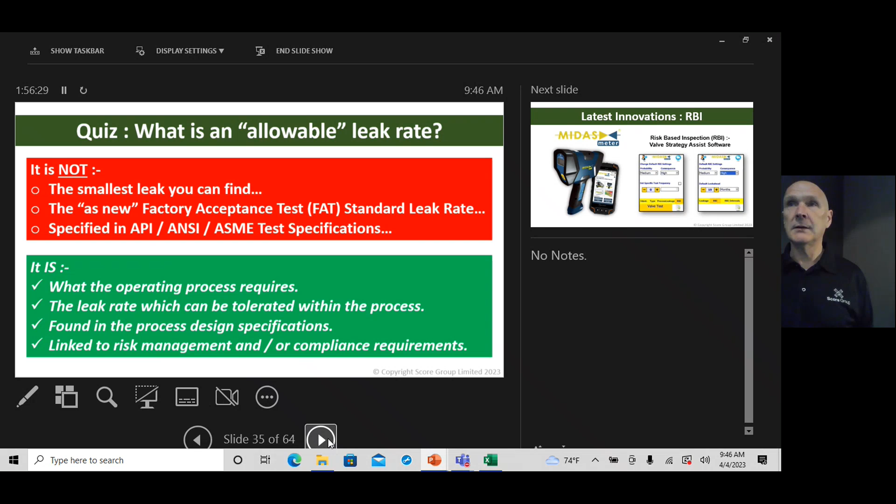And the answer is very simple. We go to a risk-based inspection calculator. What's the probability of failure? What's the consequence of failure? All we ask you to do is go to that drop-down box and click low, medium, high, or none. It's as simple as that. That's going to guide you which valve to survey, and when.

Because again, that's one of the frequently asked questions: how frequently do I need to survey that valve to manage that risk? As a minimum, you want to be doing surveys on the same time periods as what you used to do your maintenance interventions. Ideally, you want better resolution on your data set than that. But as a start point, you could start there.

I'm not sure how long it's been since we did it, the Wynnewood refinery. It'll be a few years now. We might want to go back and look at all those same valves again and compare the data set, and say, okay, how's that trending? Has that valve that had 0.1 litre of leakage per minute now gone to 0.2, or are we at 0.5? Or have we completely run off the scale and we're getting several litres per minute going through that valve, increasing our risk profile? So again, it's this concept of managing the risk over time.

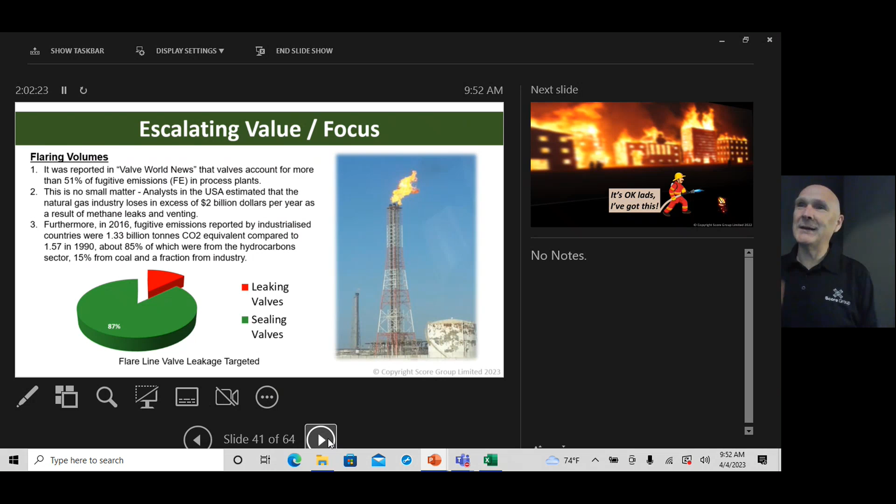And the reason for that is that these highly sensitive tools that can find the ppms of leakage in your valves, in your flange joints, are cumulatively finding something like a couple of tons of leakage per annum. Do you have the maintenance resources available to make that go away? If you do, you're going to have a massive budget, making the difference of about a couple of tons.

If you've got flare line valves that are leaking and you can't find the leak, those tons of gas are going up into the atmosphere potentially on a daily basis. What do you really want to spend your money on in your maintenance budget? If you want to make an impact on environmental performance, sustainability, and reduce flaring and venting exercises, you need to go after the big leaks.

We don't want to spend all our time rummaging about in the waste baskets. We want to keep the city safe. So let's go after the tons.

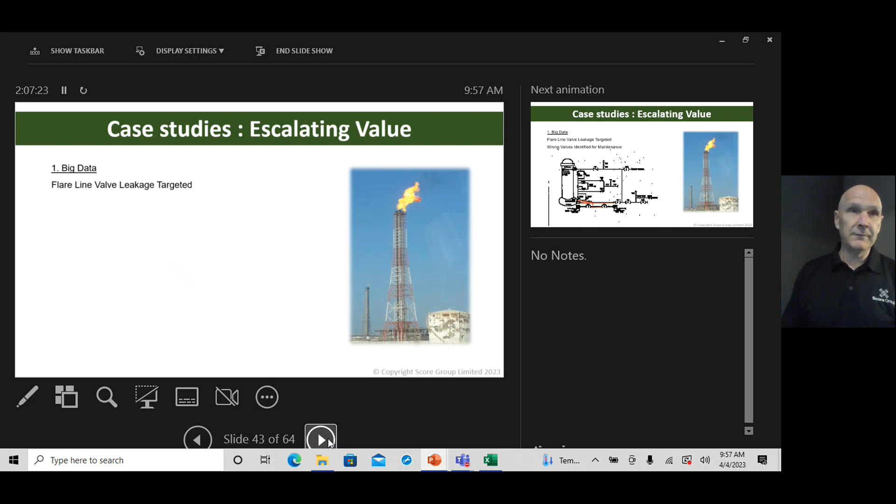We have 2 presentations in the conference, one of which I'm going to tell a story about something that happened quite close to here, where we surveyed a whole population of valves, 62 valves. Out of that population of 62, there were 8 leaking, and we were able to save the customer $342,000 on their maintenance program.

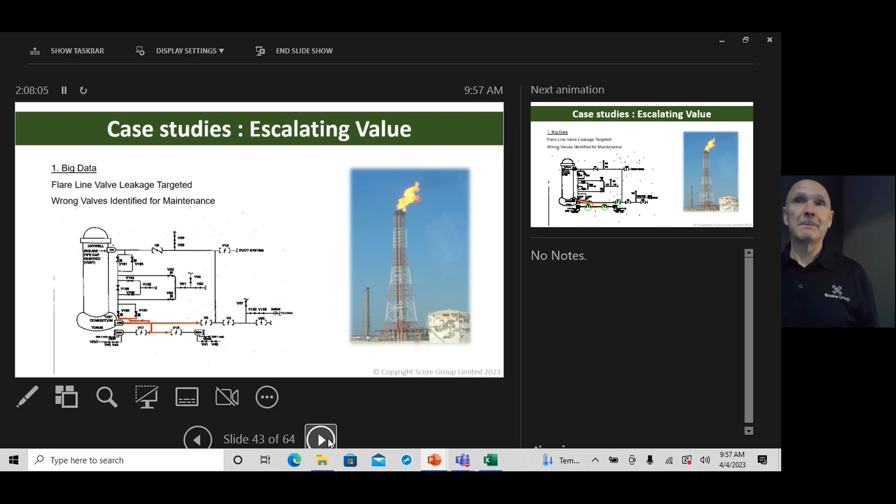That's before we even start talking about product losses. And by the way, they also wanted to install a $2.5 million air scrubber to strip the gas back out of the system, which they no longer needed to do because they just addressed the leaking valves. You don't have to filter out gas if the gas doesn't exist in the first place. So it's about root cause analysis.

So understanding all these models, understanding all these case studies, as I say, we'll be running through this in the presentation. Coming back to our allowable leak rates, what are the insights that we are delivering back? If we're taking this valve survey here, again, these are real survey data that I've just mentioned from that local survey we did here. These are the 8 leaking valves.

Which ones are we going to fix? On the left-hand side, we're looking at annual losses financially. So the CEO is looking at this and saying, guys, get after valve 4, then number 5, then number 3, then number 7. But if you're looking at it from an environmental perspective, on the right-hand side, pounds per hour of lost product to flare, we're chasing valve number 7 first, then number 4, then number 5. And we're in the law of diminishing returns.

So think about how you're slicing and dicing data. Where are the insights? Where are we adding value? Financial focus, valve 4; environmental focus, valve 7.

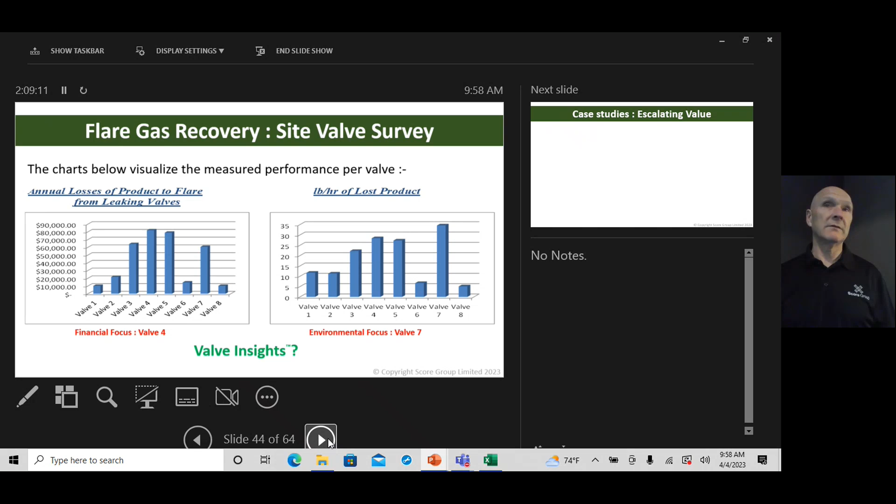The more data we have, the better the insights we get. So I mentioned our other potential failure modes, other systems are in play, other sensors are in play to try and find those other failure modes. It's not just about the fugitive emissions. We can have valves that are stuck in a partially open or fully open position that are causing much more damage than anything that could be coming out the stem packing.

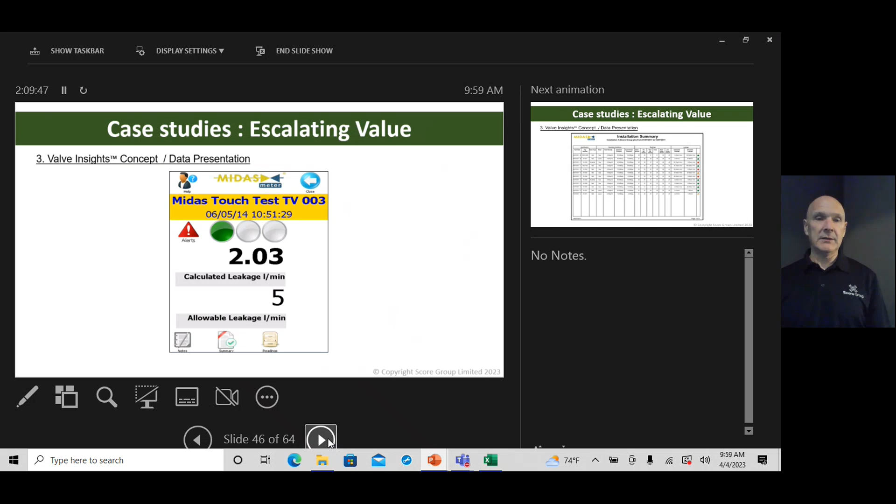So let's understand that, go beyond just the leakage data, and yes, quantify it, yes, go on our traffic lights, yes, pursue the red traffic lights, report it in this fashion. All our leakage rates against our allowable leak rates, and there's all our traffic lights guiding us where to make our maintenance intervention, where to spend our maintenance budget.

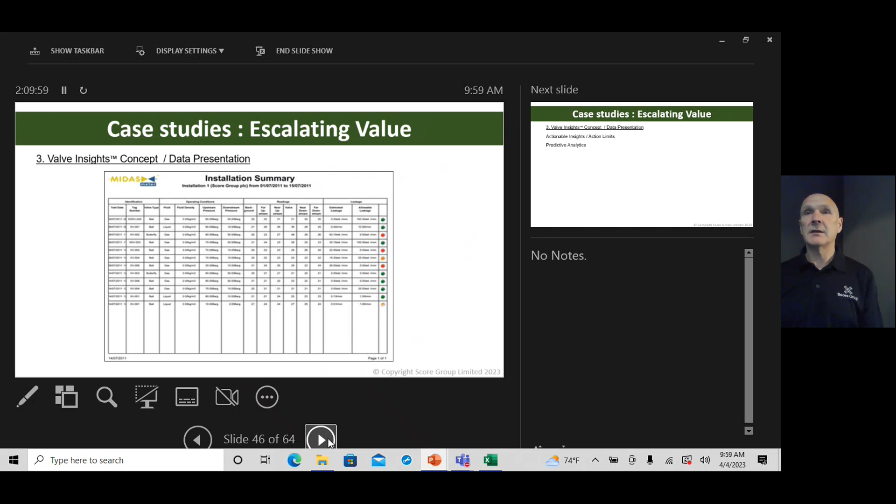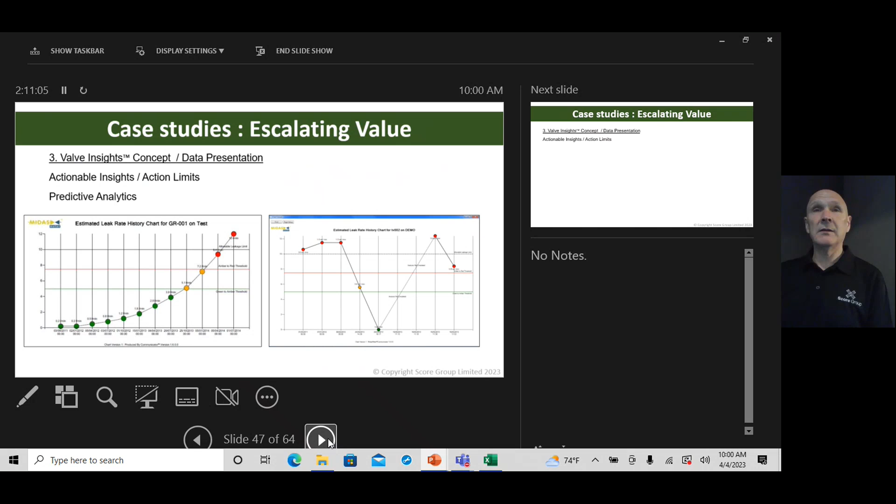So for me, what's happened here is a temporary repair. That could have been just exercising the valve, and the green could have been sealant injection. Problem with sealant injection, of course, is the next time you operate the valve, the sealant gets flushed away and you're back in a potentially worse position than you even started in. So it's important to understand all these data insights, where we sit on this graph at any one point in time.

This is not a perfect science. No measuring tool will ever give you perfect science. So again, we run through limitations, we run through examples of where there could be challenges.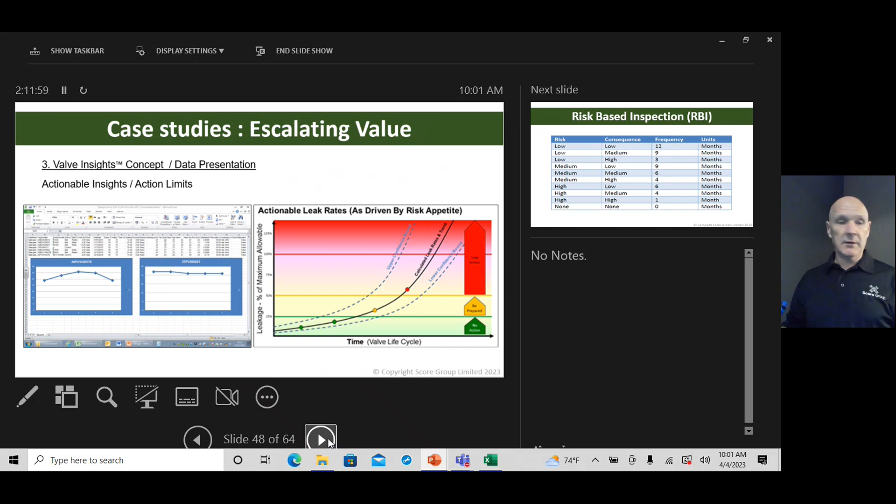On the training course, we talk about things like insulation. So we have these little waveguide devices that we can attach to the front end of the sensor, which allows us to access more valves, whether it's in a thermal challenging position outside the safe operating temperature of the sensor, for example, cryogenic valves, steam valves. We use this as a thermal protection, but we can also use it as a mechanical reach to go through insulation. So you don't have to strip out all the insulation. You can just create an inspection point to get you back down to the metal substrate.

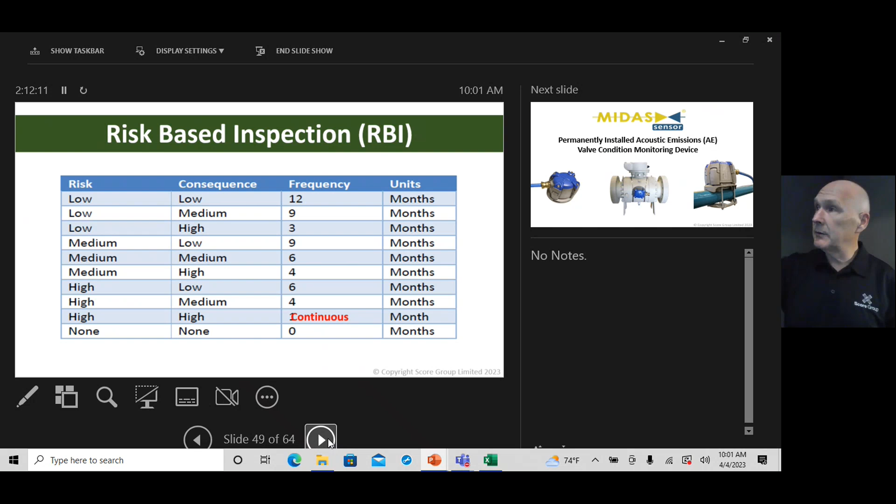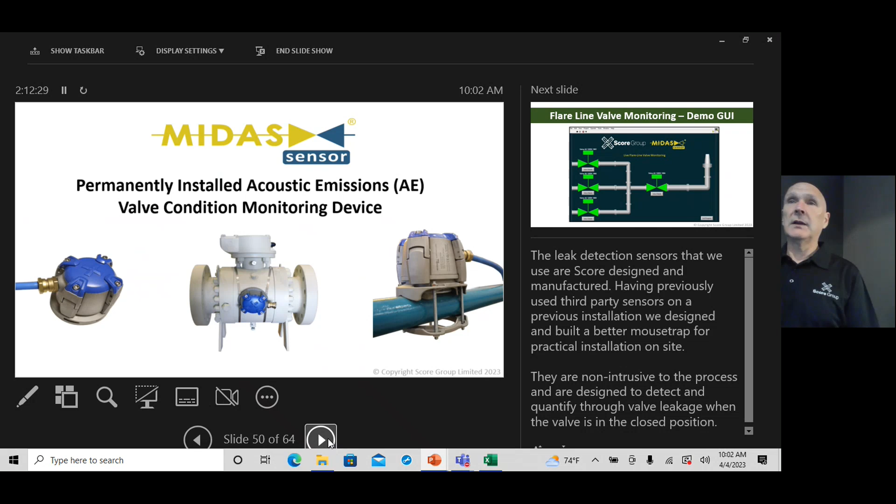We mentioned once you get into the most critical valves, you want to have the permanently installed sensor doing continuous monitoring. That is the permanently installed sensor, exactly the same devices in the front end here, doing the same work, but you've left it out on the plant in real time, all the time. It's now talking back to the control room. So if there are 100 or 500 valves on the flare line, you're now looking at a graphic user interface that says all the valves are good, everything's green, I'm not worried about any of these.

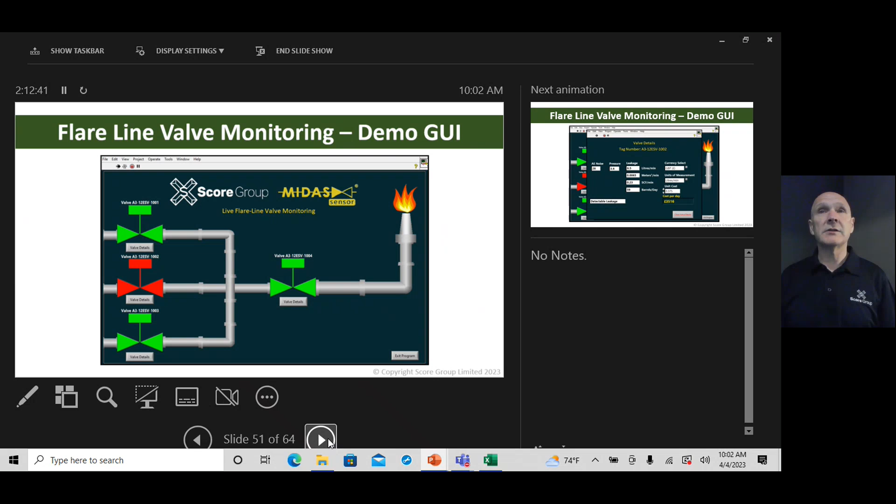If anything goes wrong, suddenly you can now see one of the valves has turned red. I can drill into more valve details. It'll tell me the acoustic readings, it'll tell me what the leak rate going through the valve is in whatever units you select, and it can even calculate the cost of that leak, which in this case, because we've entered a unit cost for process fluid, is about £3,500 — and I put that in British pounds, GB pounds — that's about $5,000 per day going through that valve.

And it's not a big leak. 6.5 litres per minute. People imagine 6.5 litres per minute is a big leak. I'll put this in perspective for you. If you just hold out your finger and blow gently on it like that, almost like you're whistling, that's about 5 litres per minute of leak. It's literally a whisper leak.

So think about that on gases as well. These are not big numbers in terms of leak rates, but they're big numbers when you start calculating the cost of the process fluid that you're losing. In the most complex systems, this is a graphic user interface for our VMAP system. Again, we're talking about 48 different failure modes being monitored here.

This is a system that is installed in Norway. Since we made that graphic, they've extended this by another 50%. So there are actually 62 valves now being monitored with our VMAP system, trying to get to the root cause on those 48 failure modes.

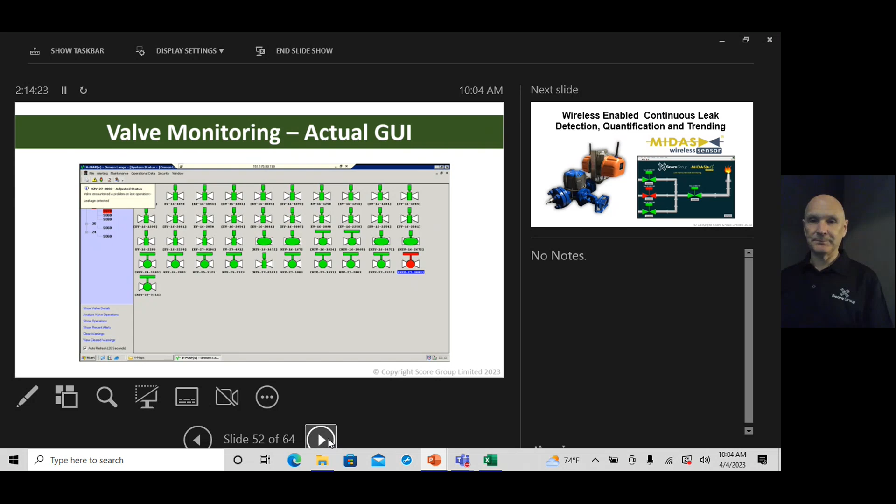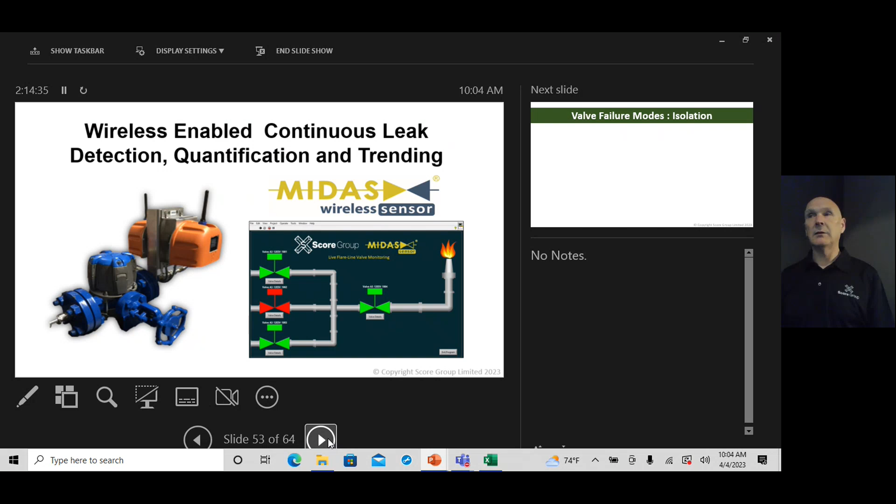I should point out that we cannot predict electrical failure, so we're actually only able to predict 47 of the potential 48 most common. But I think we're doing okay there — that's 98% diagnostic coverage. There's a lot of discussion in the marketplace about wireless systems. If you want these permanently installed kits to be wirelessly transmitting information back to the control room, we can do all that already. It's not a limitation of this technology.

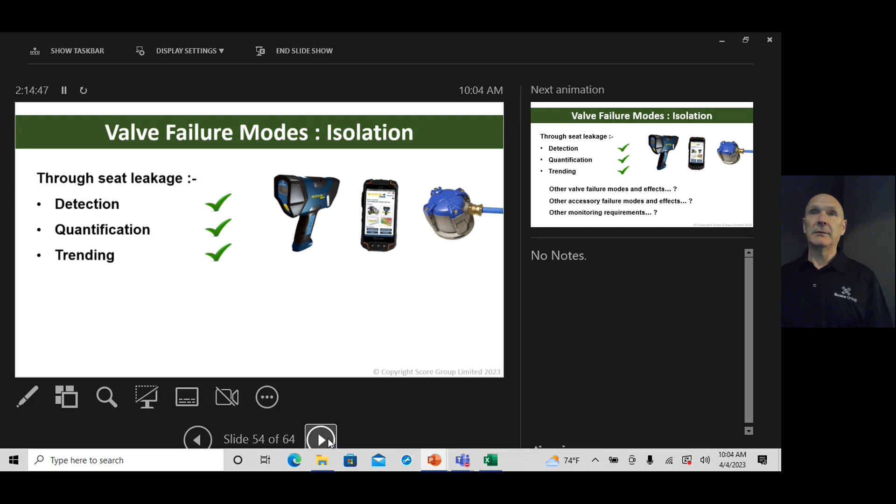So we do have some of these other tools with us this week. We'll show you some of them upstairs, or rather at the hotel — I keep saying upstairs, it's not here, it's at the Hilton. But we'll show you these other technologies.

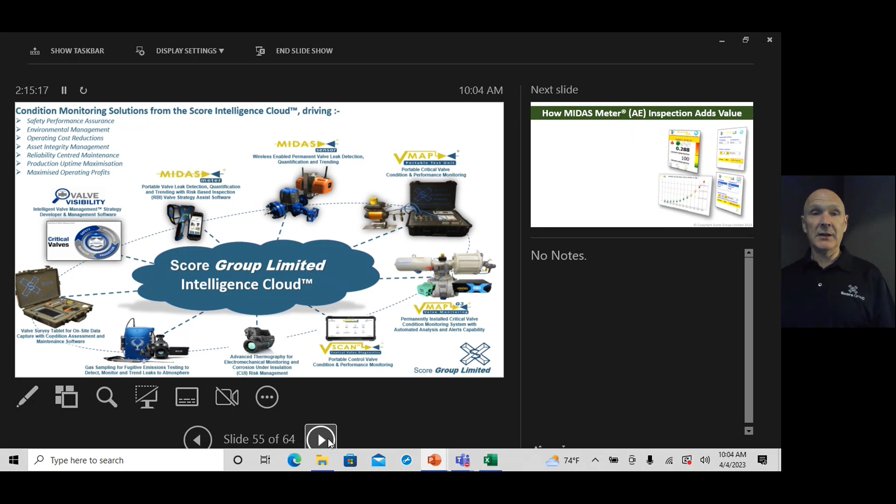This all contributes data into our intelligence cloud that allows us to optimally manage large valve populations on behalf of our customers. And that's effectively what we are — we're a valve management company.

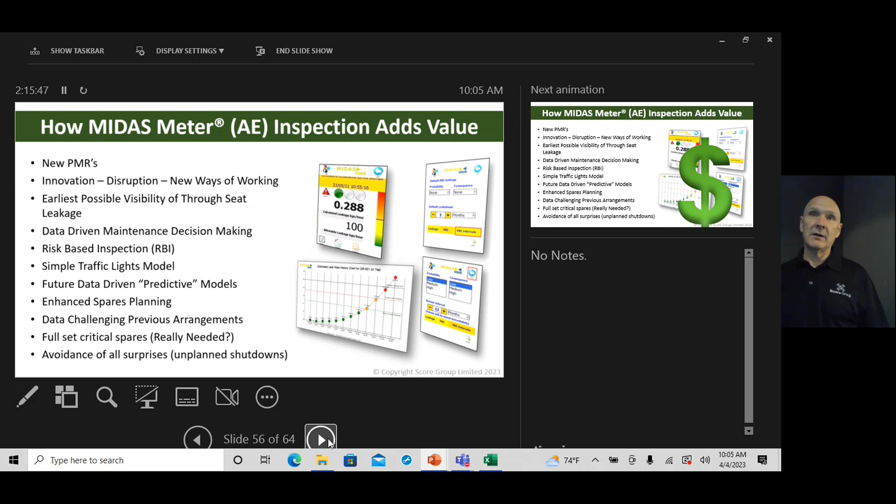And maintenance routines can be challenged because not all are adding value. What we want to do is use the data to drive our behaviours to the most efficient and optimized model of valve management that we can possibly implement at any one point in time. This will change the way you have been operating in the past and make you much more efficient and effective moving forward. All of this gives you a massive return on investment.

Regardless of who you are on the process plant, there is value. So I mentioned this earlier on, most operating companies, when you go and speak to certain individuals on the plant, they'll say, what's in it for me? You know, why should I bother? What value are you going to add to me?

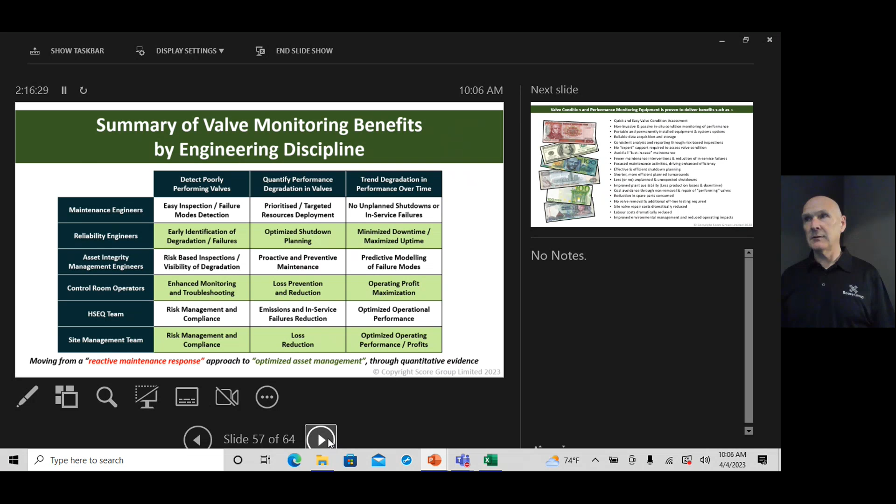So I put this matrix together just to show this is not just about the maintenance team. It's not just about the environmental team. This goes from everybody on the plant all the way up to the C-suite. Everybody can extract value, whether it's just finding the poorly performing valves through to trend degradation in performance over time. Everyone is going to get a return on investment in interacting with this technology.

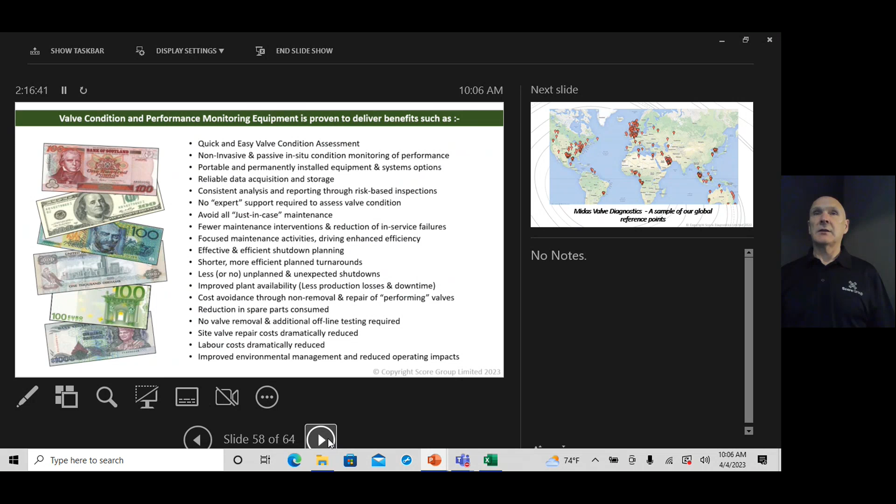Case studies all focused on financial elements, sustainability elements, management of risk in the broadest possible terminology. As I say, this is not brand new technology. We've got lots of happy customers around the world. Pretty much every blue chip company that you would expect to be playing with this device has played with it somewhere in the world. So if you're sitting there in a company that's not used it already, we can probably put you in touch with someone in your organization who's at least had an on-site demonstration or deployed it for troubleshooting or gone all the way right through to risk-based inspection deployment.

Testimonials from those people. Training course generally gets excellent feedback because we're not just telling you about what the tool is and what it does, we're showing you where it adds value.

So in terms of coming to a conclusion, what we can say is that this is, in obviously our opinion, the best available technology to take you to that new operating level where you're not going to get the same old return on investment that you got. We're moving to a new position by doing things differently, disrupting your old methods of working to take you to value-based maintenance, but you will only get the benefits when you start deploying the technology. So key message, let's not wait any longer to get it deployed. Let's not wait any longer to get the insights that are going to drive us towards new behaviours and optimised performance.